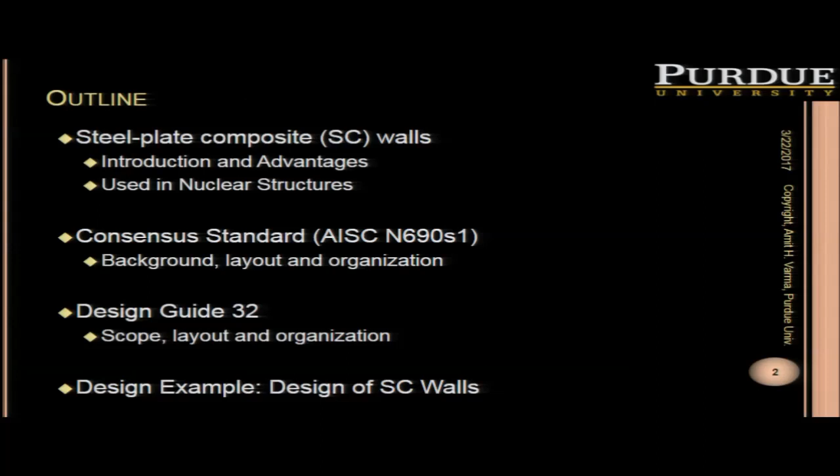Now, SC walls—the motivation for their existence comes from the history of construction methods. We have been trying to accelerate our construction schedule for several decades. We started off with reinforced concrete, looked at slip forming, steel deck construction, and then slowly arrived at modular SC construction. The reason for that is, of course, the rebar congestion that one can get when designing using reinforced concrete.

The motivation is because rebar cages can be time consuming. You can virtually have a wall of rebar on the exterior surfaces, and then questions about concrete flowability and so on arise. So in order to address some of these topics, steel plate composite construction has been proposed and used to provide designs for nuclear facilities.

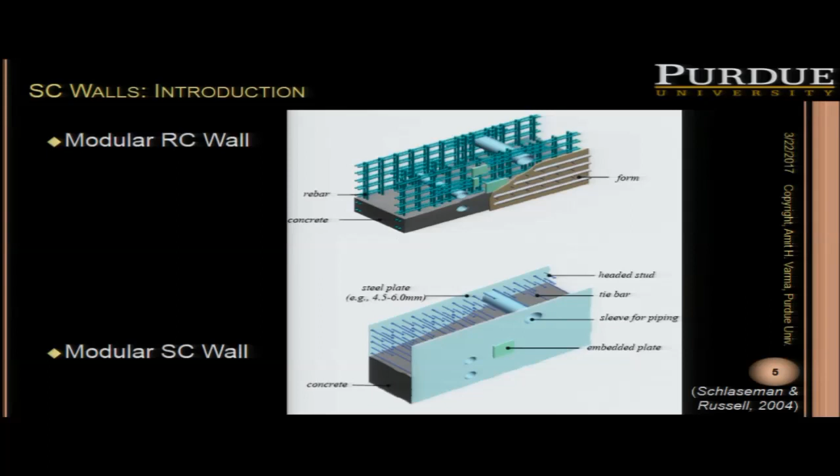Whereas for a modular SC wall, the steel plate itself is a stay-in-place formwork, as you're seeing here. We've talked about the rest of the components in the system. It's relatively easy to accommodate embedment plates and attachments, and also sleeves for piping and so on.

Modularity is really the key, and we have modularity as a structure and modularity from a construction perspective. It permits prefabrication, pre-assembly, and modularization to reduce construction time. The modularization of the steel modules and submodules allows for easy concrete placement, perhaps penetrations and attachments as well.

This steel plate composite construction has been identified as part of the modular solution. I believe some of the newer SMRs are also utilizing these steel plate composite walls.

Where have they been used in the nuclear industry? Just a listing of the projects: it has actually been used by GE, Hitachi, and Toshiba in their ABWR located in Kashiwazaki-Kariwa, Japan, Units 6 and 7. That was used in 1996.

I've actually seen a mock-up of the steel plate composite containment internal structure in Japan when I visited MHI. They've been used extensively in the AP1000 plants being built in China, in South Carolina, and in Georgia. The US APWR plant, designed by the Japanese and by MHI, extensively uses steel plate composite modules.

The APR Plus, designed by the Koreans - I was in Korea last week having a discussion with KHNP and KINS about their APR Plus design. They definitely are using steel plate composite systems there as well.

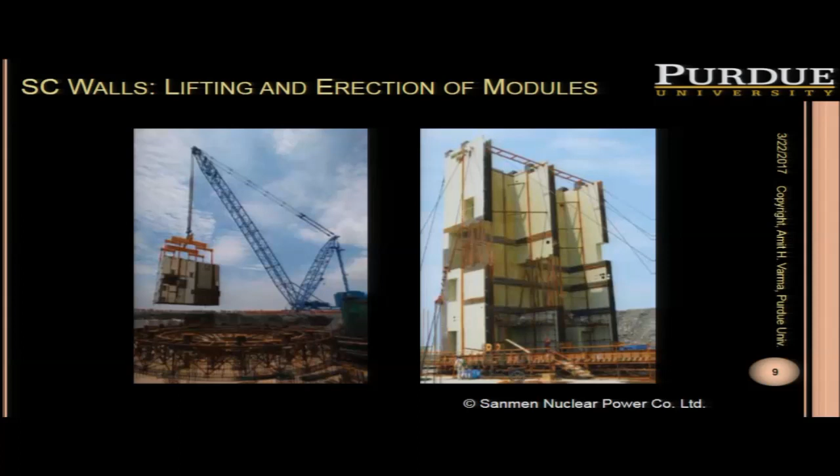These are some pictures from Sanmen in China. You're seeing a module being lifted up and brought in and placed at the site, inside the pit. These modules get really, really large fairly quickly.

I'll draw your attention to something interesting here. You'll see these dowel bars sticking up from the concrete foundation. This is a picture from Sanmen, and the SC wall is being lowered onto this.

You remember this detail - we'll talk about it about 40 minutes from now. The connection between the dowel bar and the steel plates, we'll talk about that when we get to the topic of connection design.

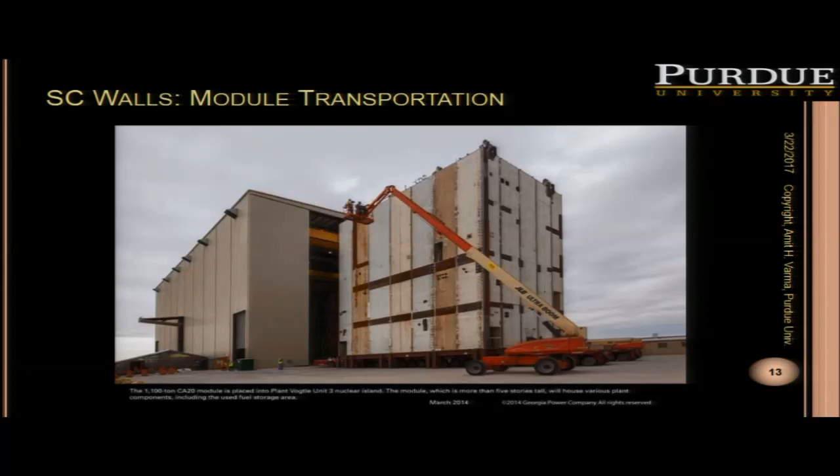This is a picture of the module being taken out - this is how big they get. This is a 1,100-ton CA20 module. The steel module has been fabricated with the plates, the studs, and the tie bars, and it is being shifted to the site for placement.

But in order to use these systems, what we really need is a consensus standard. This was published in August of 2015 - that's AISC N690 S1, which includes supplement number 1.

Appendix N9 focuses on the design of SC walls, and you would essentially use AISC N690 S1 instead of ACI 349 for the design of the structure. It includes specifications for SC walls and also the associated connections.

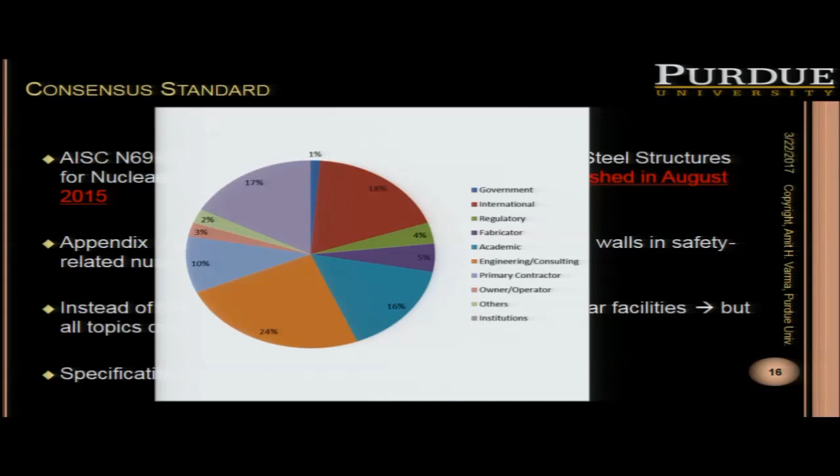This just shows you it's a consensus standard, so all the people who were involved in the committee that developed this standard include people from the government, international collaborators, regulators, fabricators, and so on. So quite a wide variety of people who've participated in the development.

We started developing the specification in 2006, and it went on till about 2015. The cumulative man hours exceeded thousands of hours just in the meetings needed to develop this consensus specification. And there it is, AISC N690 S1 2015.

It's a free download. You can download it from the AISC website, and it includes all kinds of cool provisions, and Sahas is going to talk about some of them, particularly for the design of SC walls.

When you look at Appendix N9, you'll see there are 4 sections: one on the design requirements, one on the analysis, and then the design of walls and connections as well. Today we're going to talk about pretty much all 4 of them.

The specification was great. It was a consensus standard that had been provided, but everybody felt there was a need for a design guide that would explain how to use the specification in design. So we've been working on it—really, Sahas has been working on it for the past 2 to 3 years.

He's done a great job putting it together. It supplements the SC specification in the sense that it shows you how to really use it. We are expecting the design guide to be published sometime around June of 2017.

And that's my cue for inviting Sahas to come up and talk about the SC wall design example, which consists of these 4 steps that he's going to talk about.

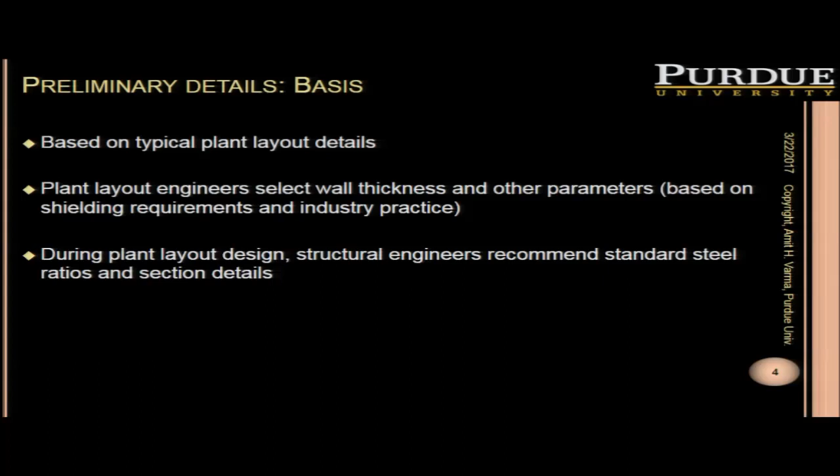During this phase, what the structural engineers can do is recommend standard steel ratios and section details. Once the layout design phase is done and you have the layout finalized, you'll come to the detailed design phase where you can check, design, finalize, and optimize your SC design.

In this session we're going to consider a typical SC wall and design it. We'll go through all the steps of the specification and see how you would use it.

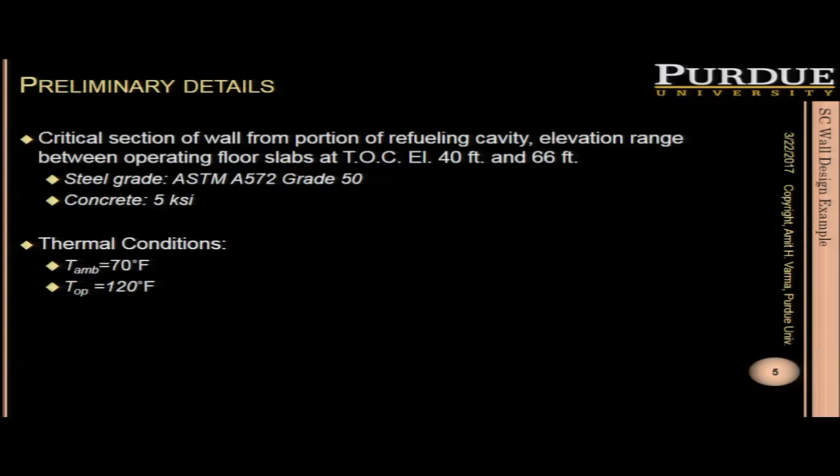The preliminary details for the example: we are considering the critical section of a wall, a portion from the refueling cavity, between elevations 40 feet and 66 feet. The steel grade is grade 50, concrete is 5 KSI. You would get the operating thermal conditions and ambient thermal conditions for the plant. We are not considering any openings or attachments for this particular wall.

As Dr. Varma showed you, a typical SC wall would have openings and attachments. The specification also talks about fabrication and construction tolerances, which are very important because of the size of the modules you saw — you need to combine the modules, so those tolerances need to be satisfied. For this example, we are considering that those tolerances are met.

For the preliminary details of the wall, you get your unsupported height. The SC section thickness is governed by the plant layout shielding requirements. Then the faceplate thickness can be decided by the structural engineer, who can start with a particular reinforcement ratio, which gives the faceplate thickness. The shear connector spacing and tie spacing — you would start with a typical value, and once you start optimizing your design, you could optimize these values.

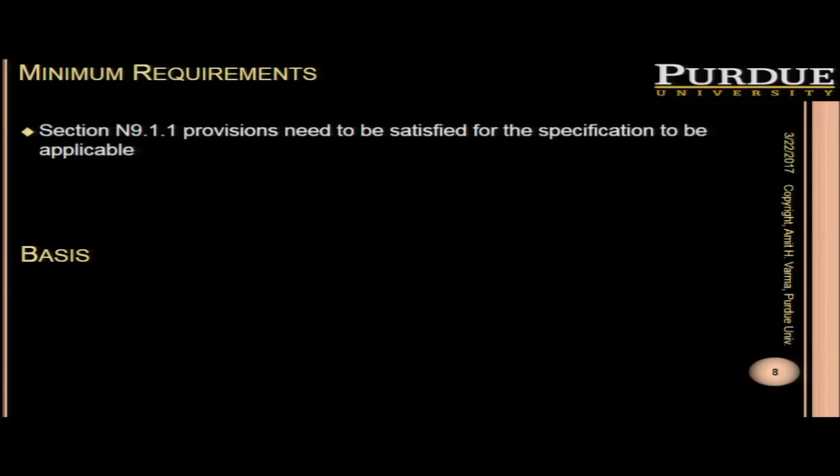With our preliminary details, we want to see if the parameters satisfy the minimum requirements of the code, so we can use the provisions of the code. These requirements given in this section of the code need to be satisfied, and the basis is that the provisions are based on a range of experimental data, and these requirements are for that experimental data.

There is a need for detailing the SC walls to prevent certain limit states or failure limit states from governing. There's an EJ publication coming out in the second quarter which talks about all of these minimum requirements, the sectional detailing provisions, and the basis for all of them.

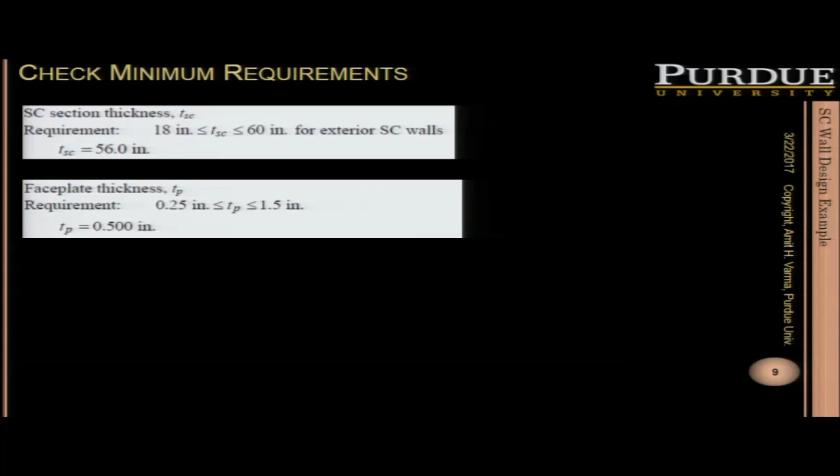We're going to verify that we are meeting these requirements. The SC thickness — we have a 56-inch thick wall, which meets the requirements. Our faceplate thickness is 1/2 inch, which meets the requirements. The reinforcement ratio, which is the ratio of the area of steel versus the total area of the wall, meets the requirement. The basis for all of these is discussed in the design guide.

It's discussed briefly in the specification and in the publication we just talked about. The yield stress needs to be between 50 KSI and 65 KSI. For concrete, it needs to be between 4 KSI and 8 KSI, and the code doesn't allow lightweight concrete as of now. We need to satisfy the detailing requirements, which we would talk about: the faceplate slenderness requirement, shear connector detailing, and tie detailing.

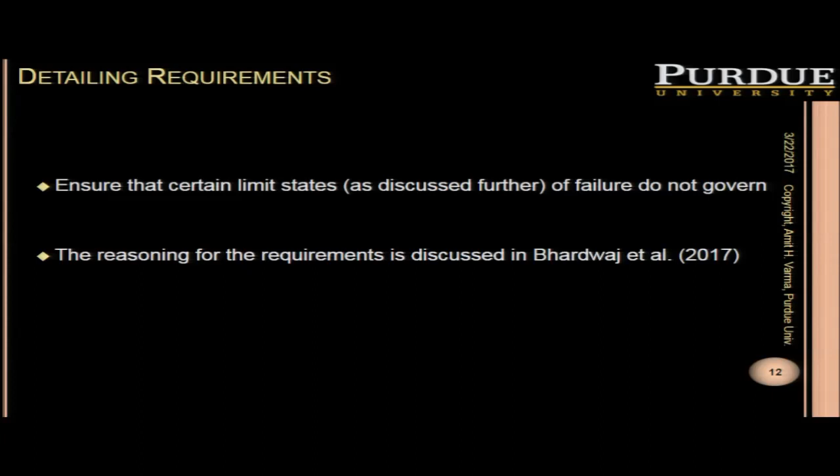We'd start off with the faceplate slenderness requirement. These detailing requirements ensure that certain limit states of failure do not govern your design. The first one ensures that your stud spacing is limited so that the faceplate yields in compression before compression buckling, and that's the requirement.

Where b is the largest unsupported length of the faceplate, the requirement states that as long as your faceplate slenderness — the ratio of the largest unsupported length to the faceplate thickness — is less than the root of E by F, you meet the slenderness requirement. I'm tempted to go into the basis of these things again, but all of that is available in the design guide, you can look at it.

For our design, we said the stud spacing is 6 inches and the tie spacing is 24 inches. So you have your ties spaced at 24 inches, and then you have studs in between those ties, which are spaced at 6 inches.

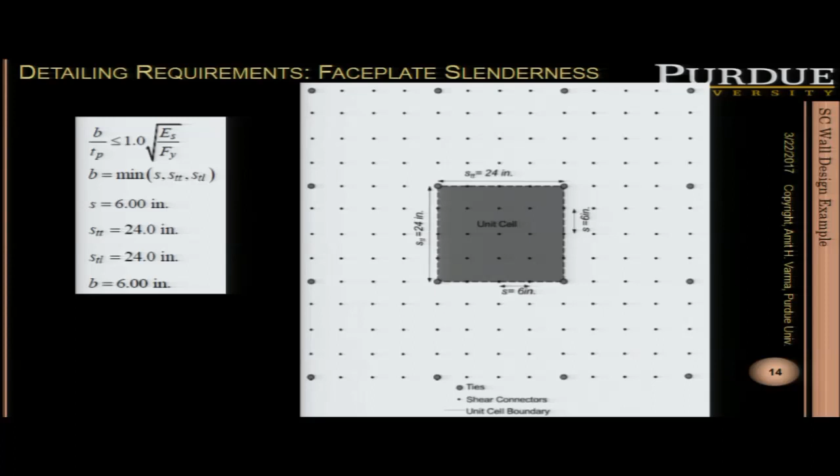So the largest unsupported length for this configuration would be 6 inches, and it would be different for different configurations of studs and ties. You can calculate the slenderness ratio and check it with the requirement in the code to meet that requirement.

Next step we get into is the shear connector detailing. The shear connector detailing ensures that the stud spacing is limited to ensure the composite action in SC walls.

You would start off classifying the steel anchors as yielding or non-yielding, based on whether the anchor can maintain an interfacial slip greater than 0.2 inches when the load is 90% of the peak load. For this example, we are using steel-headed stud anchors, which are classified as yielding. If you're using any other kind of anchor, you would have to perform experiments to see if they are yielding or non-yielding. If you have a combination of yielding and non-yielding anchors, the system is classified as non-yielding. For this example, we are using yielding anchors.

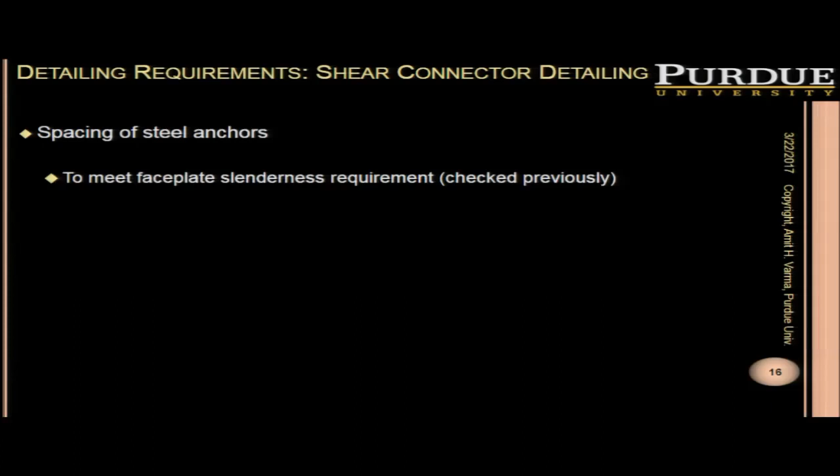The next thing in your shear connector detailing would be the spacing of the connectors. There are 3 criteria: the faceplate slenderness requirement, which we just looked at; the requirement to achieve a desired development length, which gives another spacing limit; and the requirement to prevent interfacial shear failure from occurring before out-of-plane shear failure. We'll discuss that briefly.

Let's look at this development length requirement. This development length, similar to what is in reinforced concrete, is the distance over which the faceplate can develop its yield strength. That depends upon the area of steel anchors provided and the shear strength of a particular anchor. C1 takes into consideration if the anchor is yielding or non-yielding, and that's the shear strength of the anchor. The designers can decide what is the development length - we have a recommendation, and TP is the yield strength.

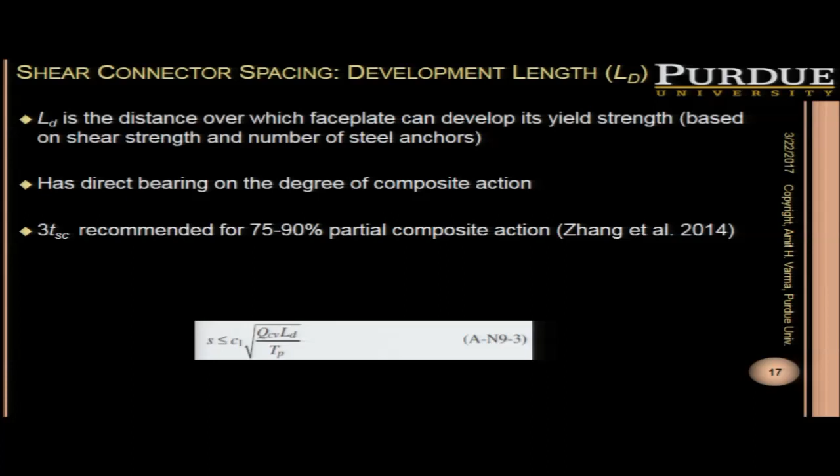Now, the development length has a direct bearing on the degree of composite action you can get. Zhang et al. recommend that if you have a development length around 3 tsc, you can get about 75 to 90% of the partial composite action. So for our example, we'll consider the development length 3 tsc.

Since we're using steel-headed stud anchors, from the spec we can calculate the available shear strength. But in case you decide to use something else as a steel anchor, like flat bars, you would have to calculate the available shear strength from experiments. You have your faceplate tensile strength, and using those values along with the factor that accounts for yielding or non-yielding anchors, you can see the requirement is satisfied.

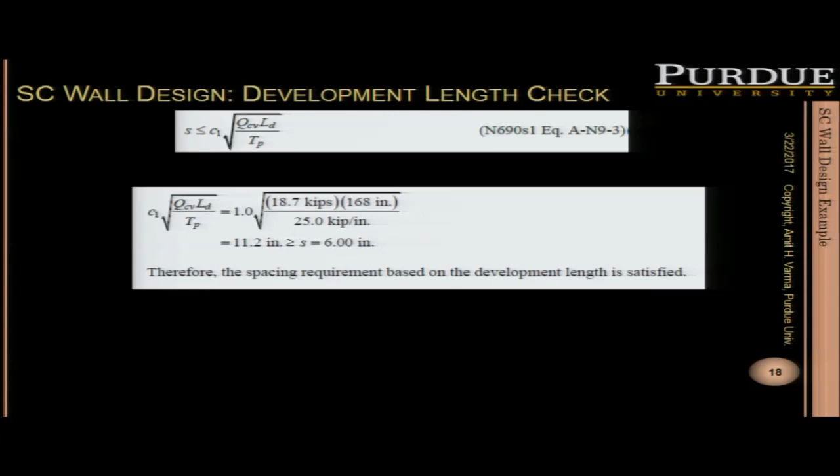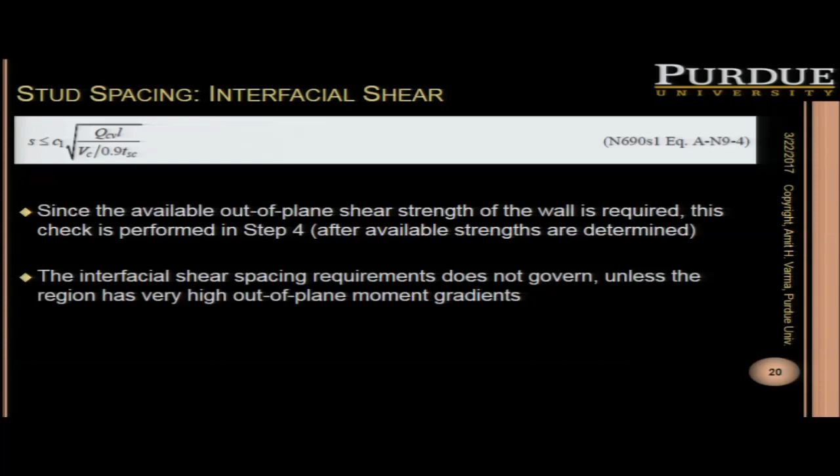The next thing was interfacial shear. We need to limit the stud spacing to prevent interfacial shear before the out-of-plane shear failure - we want to avoid the interfacial shear failure mode. That's the spacing requirement; C1 again takes into consideration if it's yielding or non-yielding, and VC is the available out-of-plane shear strength, along with the shear strength of the anchor and the SC thickness. We need the available out-of-plane shear strength to check this requirement, but we haven't calculated it yet - we don't have any available strengths as of now. So once we calculate the available strengths, we'll get back to this step and check this calculation.

We've looked at the faceplate slenderness requirement, and we've detailed the studs. Let's get to the ties.

What do ties do? What is the purpose? As the name suggests, they tie the structure together, providing structural integrity by preventing section delamination or splitting. Dr. Varma is going to show you a couple of figures in his presentation on what we're talking about. So ties hold the section together - they serve as your out-of-plane shear reinforcement, so they are the shear stirrups of the SC wall.

They contribute to the interfacial shear strength, and again, you would need to experimentally determine their contribution. They participate in the force transfer in the connection regions, and once you've looked at those empty modules - the size of those modules and how they need to be lifted and transported - they help maintain the form of empty modules.

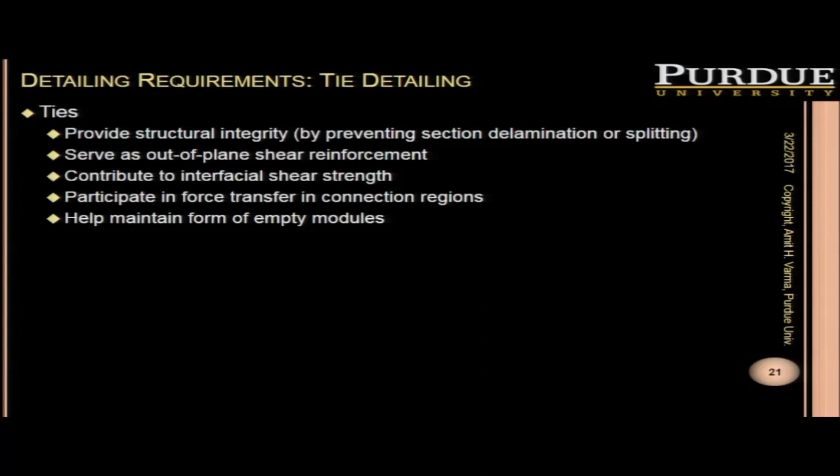The spacing requirement is that the spacing needs to be less than section thickness. We said our spacing was 24 inches in both directions, which is less than the section thickness, so we meet the spacing requirement. Next is the classification of ties.

Their contribution to out-of-plane shear reinforcement would depend upon if they're yielding type or non-yielding type. You'll see we've kept a safety margin, and that safety margin is to account for the difference between the nominal and the measured properties.

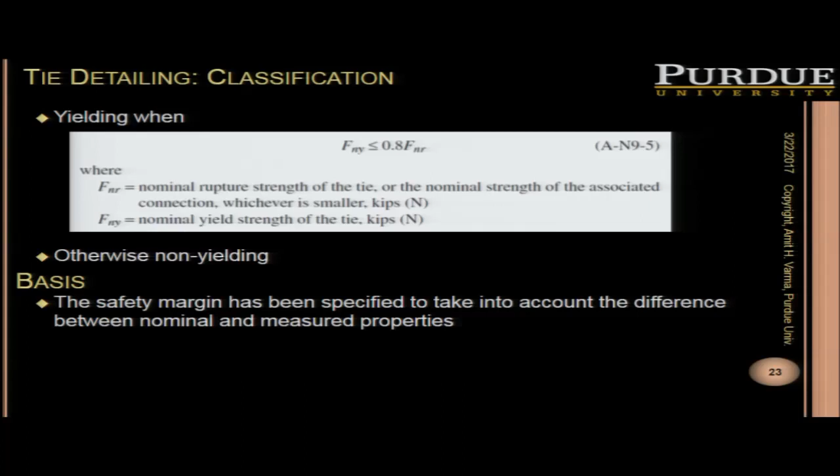The nominal strength would be either the rupture strength of the tie or the nominal strength of the connection, whichever is lesser. For our design, we can calculate the tie rupture strength and the tie yield strength. We considered that the tie-to-faceplate weld is a CJP weld, so the connection would be stronger than the tie.

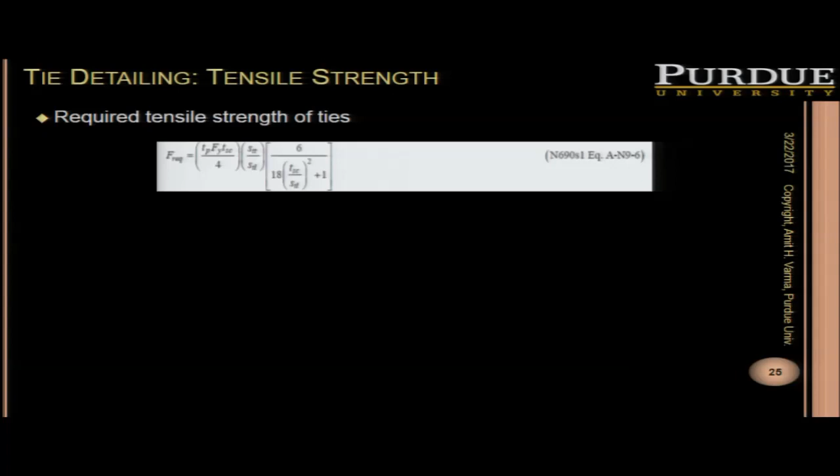So we can see if this requirement is satisfied, and we have yielding ties in our section. When we said what ties do, we said they prevent delamination of the section, which means they have some tensile strength requirement. This is based on a postulated failure mode where the section can delaminate, which would happen if you loaded just one element, either the concrete or the steel faceplate.

There would be an eccentric moment which needs to be resisted, and this force corresponds to that resisting moment. We can check that - we have all the parameters we need: the spacing, the section thickness. That's the requirement, and we can check the available tensile strength of ties, and we satisfy that requirement.

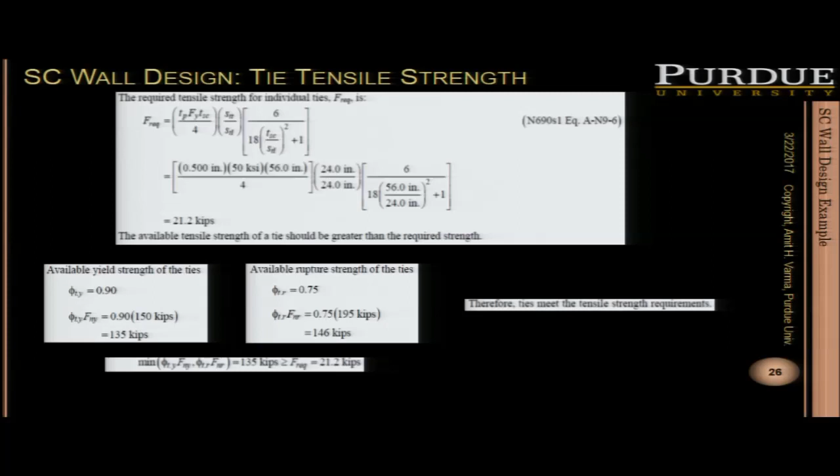So we've seen that we can use the code. We've done the major part where we've detailed our section. Now we come to the analysis procedure, where we talk about what stiffnesses to use and how to model the SC wall.

You need to check if you need to do a second order analysis - typically it would not be required. Then you need to do analysis for accident thermal loads.

Another important thing, since we are not doing that in this design example, I'd like to talk about is modeling your openings. You need to see if it's a small or large opening, and then the code and the design guide talk about the modeling and detailing requirements for those openings.

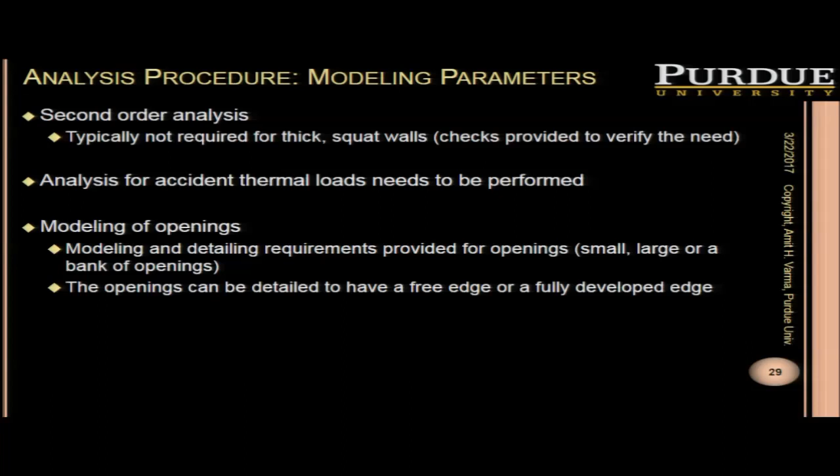The openings can be detailed to have a free edge or a fully developed edge. With a free edge, some region around the opening doesn't behave as an SC, and you need to accordingly consider that in an analysis. With a fully developed edge, you can consider it as an SC right from the edge of the opening.

So for our analysis, we did a 3D SC wall using elastic thick shell elements. That's something I'd like to talk about - you've got an SC wall which has studs, tie bars, plates, and it would have openings, but what you're going to model is just a thick shell element.

Since it's an elastic element, all you have to play with is the section thickness, the elastic modulus, and the Poisson's ratio. The importance of this we'll get to know once we talk about the model parameters as we go forward.

The analysis model parameters: we check the second order effects - we do not need to consider them. We have not considered any openings. We have performed the accident thermal analysis, and we'll discuss them.

So we have the operating thermal conditions, and that's something important we'll talk about. There are going to be two conditions, so you would be doing two analyses. One would be for your operating thermal conditions, which we are calling condition A, and the second would be your accident thermal conditions, which we are calling condition B.

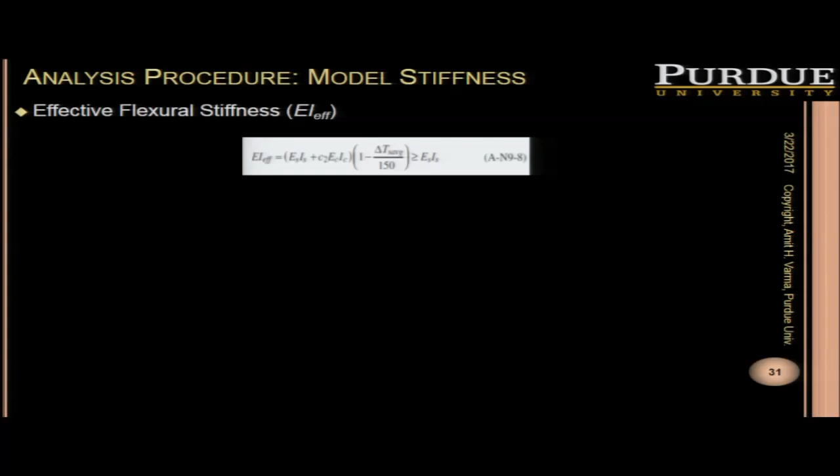Let's start talking about the stiffnesses of the model. First would be your flexural stiffness. And you see there's the steel contribution, there's a concrete contribution, but there's a factor, C2.

What has been observed is that the uncracked stiffness is not manifest, due to shrinkage, cracking, and partial composite action. This is the calibration factor which ensures that your stiffness is crack transformed stiffness. Then you see there's a temperature term, and once you go above 150, it's fully cracked, and the only stiffness you have is the steel stiffness.

So we can calculate the stiffness of a section: the moment of inertia for concrete, the moment of inertia for steel, and then the calibration constant is in terms of stiffness adjusted modular ratio, which we can again.

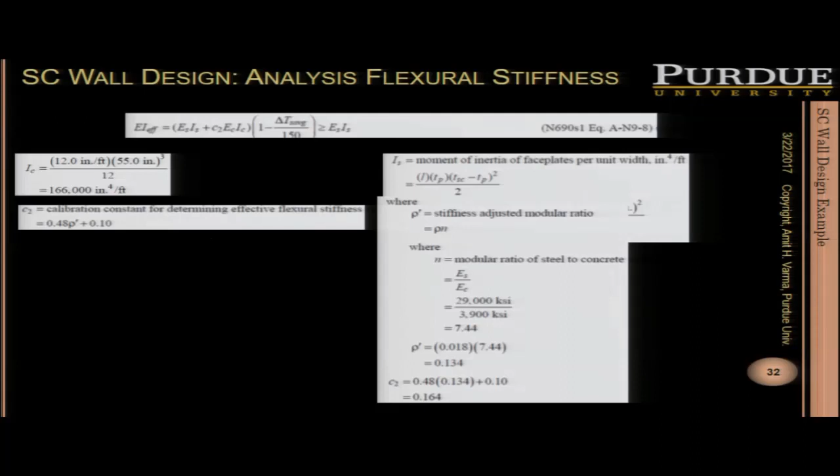So, like I said just a while ago, you would need to do two analyses: one for your operating conditions, and the other for your accident conditions. So you can calculate all the parameters, and this delta TS average, which is the average of the maximum temperature rise in both the face plates.

For operating conditions, it's considered 0, and you can calculate your crack transformed stiffness and your steel stiffness. Once you get to the accident thermal conditions, you would see that this term goes negative and your steel stiffness controls, which is what we said. In the accident conditions, it's fully cracked, and you just have the steel stiffness.

Then we get to the in-plane shear stiffness, and this depends on what is your in-plane shear demand. If your in-plane shear demand is less than your cracking threshold, you have your uncracked stiffness. If it's greater than twice your cracking threshold, you have your cracked stiffness, and then you can interpolate.

For this design example, you don't have your demands before you do your analysis, right? So you need to assume, okay, my demand is this, and then do your analysis and verify. If you're okay, it's good, otherwise you would have to come back.

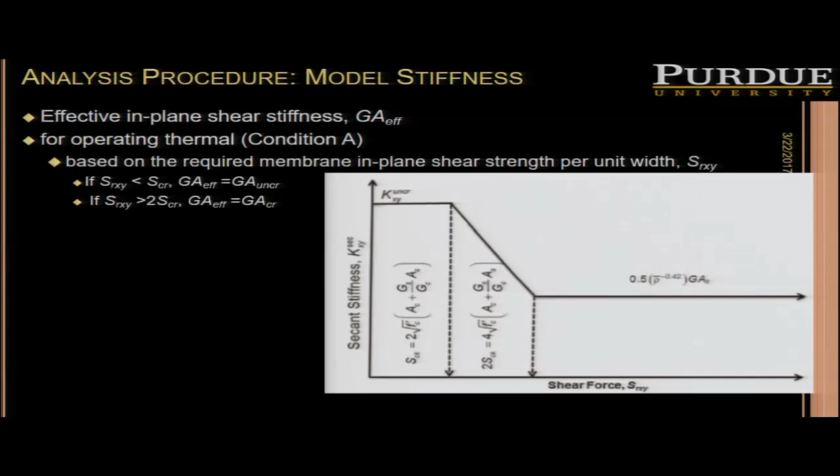For this, we consider we are in this region. And the basis is your in-plane behavior is based on steel plane stress and orthotropic cracked concrete behavior, and it's discussed in detail in the design guide.

So for condition A, we can calculate the cracked stiffness using all the parameters. We can calculate the uncracked stiffness, steel stiffness, concrete stiffness, and then the cracking threshold is considered as 2 root F prime C in PSI units. These are KSI units, so it looks a little weird.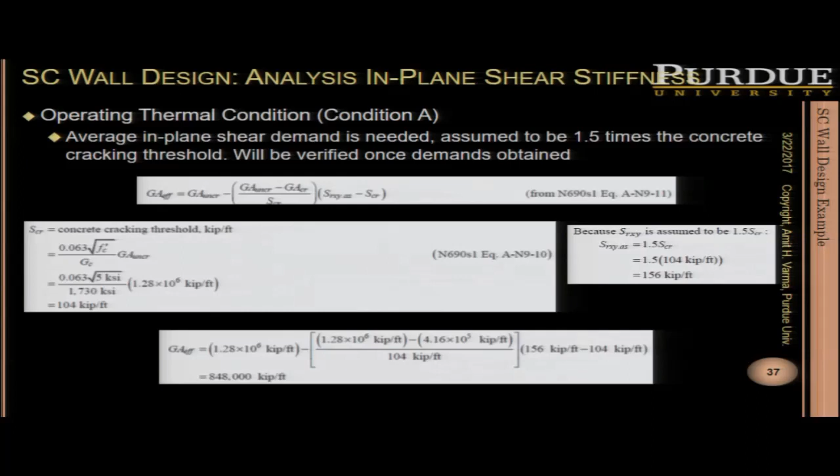This is what we assumed, that your demand is 1.5 times your cracking threshold, and then you can calculate your effective stiffness. For accident thermal conditions, it would be your cracked stiffness, and the basis is because you would have nonlinear thermal gradients which would cause concrete cracking in both directions. So we've used cracked in-plane stiffness for accident thermal conditions.

Next we come to material properties. This is where everything would start coming together. So remember, we have an elastic model, and for that model, the Poisson's ratio, thermal expansion coefficient, and thermal conductivity would be the properties of the concrete, because the concrete would govern your thermal induced displacement. The concrete is what occupies the majority of the volume.

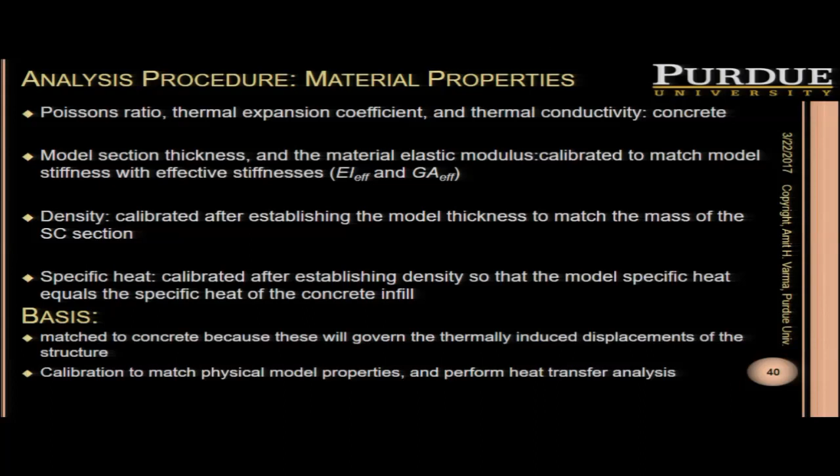For that elastic model, we have calculated these effective stiffnesses. We would calibrate our model section thickness and elastic modulus so that the stiffnesses of our model match what we've just calculated. Then we would calibrate the density so that the mass of our model matches the physical mass, and the specific heat is calibrated so that it matches with the specific heat of the concrete. So we have an elastic model where we are calibrating to match the physical model properties and perform the heat transfer analysis.

So we'll quickly look at, all these parameters are concrete parameters. So you have calculated your effective stiffnesses, and then you have your modulus for the model and the thickness for the model. You've got two equations. You can calculate the values for operating condition and for accident condition.

Your material density should match the mass of the physical model, and your specific heat should match the specific heat of the concrete. This is what it looks like. It could be confusing because you're not modeling a 56-inch thick wall - this is the thickness of your model for operating conditions and for accident conditions.

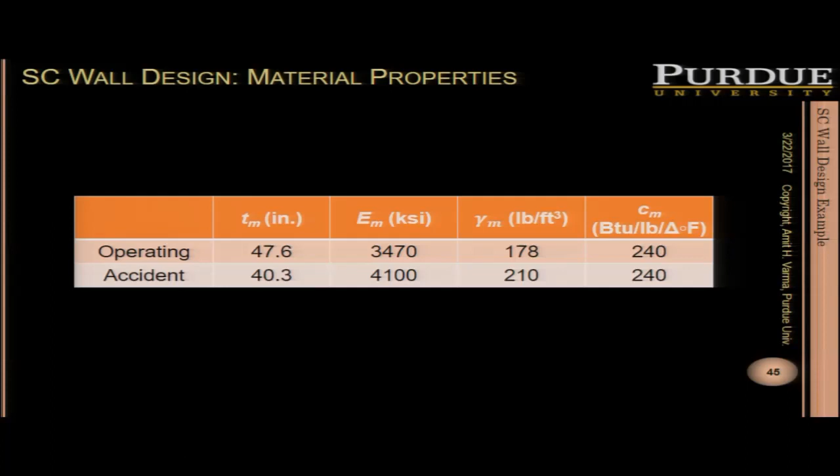That is why I said you're going to have two analyses. You're going to have two models, one for accident and one for operating.

Let's talk a little bit about the thermal loads. You would need to do heat transfer analysis using the material properties we've just defined for accident loading. These analyses would give you surface temperature histories and through-thickness temperature profiles, which would be a nonlinear thermal gradient. If it's one-sided heating, you can see that nonlinear thermal gradient through the thickness, through the depth of the section. What we do in the analysis is pick up these points and use a linear thermal gradient for the analysis.

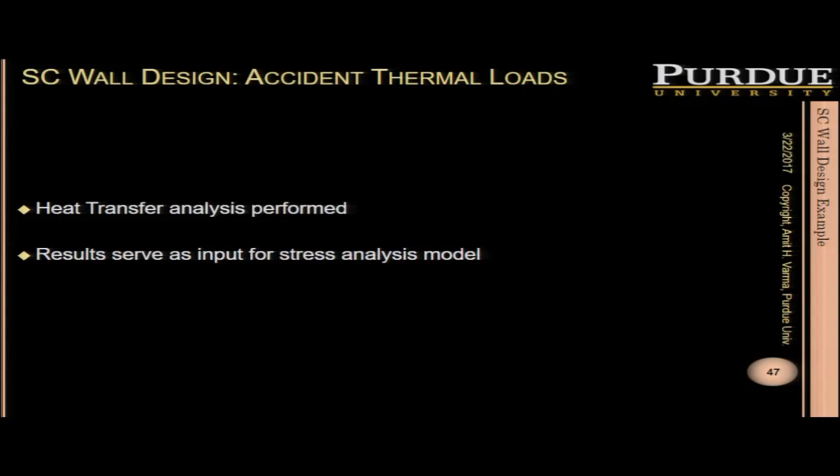So the thermal load is applied as a linear temperature gradient through the wall for the stress analysis. That is what we did for the example - we did the heat transfer analysis, and the results from that served as input for your stress analysis model.

Let's talk a bit about the load combination. Chapter NB2 provides the basic load combination, and based on project requirements and the design basis document, you can have additional load combinations. These load combinations imply linear superposition of demands - that's again why it's important that we have that elastic model. The combinations are there for condition A and for condition B. In operating condition, we do not consider concrete cracking, and in the accident condition, we consider the concrete cracked.

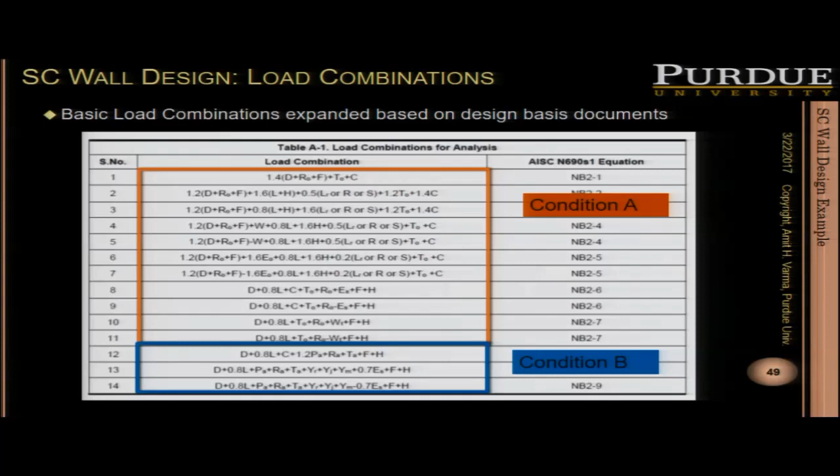So those are the basic load combinations from N690. You see the operating T-naught - these are the condition A load combinations, and then condition B load combinations 12, 13, and 14, which have the accident thermal conditions. You could expand on them based on your project requirements. So these would be your basic load combinations.

The specification does allow averaging over 2tsc by 2tsc in the interior regions, and over tsc in the connection region and around the openings. The required strengths include out-of-plane flexural strengths MX and MY, twisting MXY, membrane axial strength SX, SY, and SXY, and out-of-plane shear demands. So you'll have 8 demands that you'll get for each element.

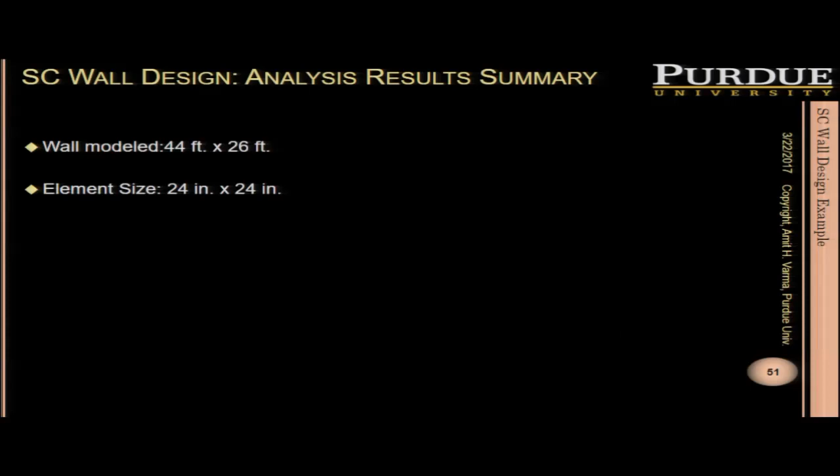So the analysis results summary - we'll just talk about the summary of the results. We model the wall, we have the element size, we use 24 inches by 24 inches. You would have all the data for each element, for each load combination, and then you would combine and evaluate that data.

What we are doing is just looking at the peak demand for each demand type, and the element numbers. What you see is the accident thermal load conditions usually govern, and the peak demands are at the base of the wall.

Averaging is permitted, but we've not done any averaging. If you recall, it's been a while, we talked about it - when we calculated the in-plane shear stiffness, I said we are assuming that it's 1.5 times the average demand. So that's the ratio of the demand versus the cracking force, and you see the average is around 1.5. So we are okay, we don't need to redo the analysis.

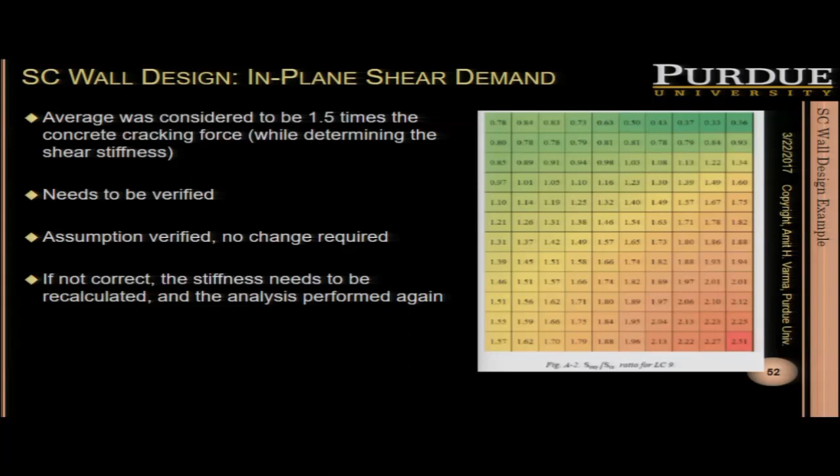What's the time? Okay, so this is when I would start sprinting. So that's the design procedure. What I want to do is quickly show you how you would calculate the individual available strengths, the demand capacity ratios, and what are the interaction requirements in the specification.

Let's start with uniaxial tension. It's governed by the lesser of the tensile yielding or the tensile rupture. You can calculate the available strength, and then you can calculate the demand capacity ratio for all the elements in the wall. You would do the same thing for the compression.

You would calculate the buckling stiffness, and then go to the specification and calculate the compression demands. But if you look at it, you would see it's very over-designed because the thickness of the section is based on the shielding requirements. Dr. Varma is going to talk more about why this is important and how it would affect your connection design.

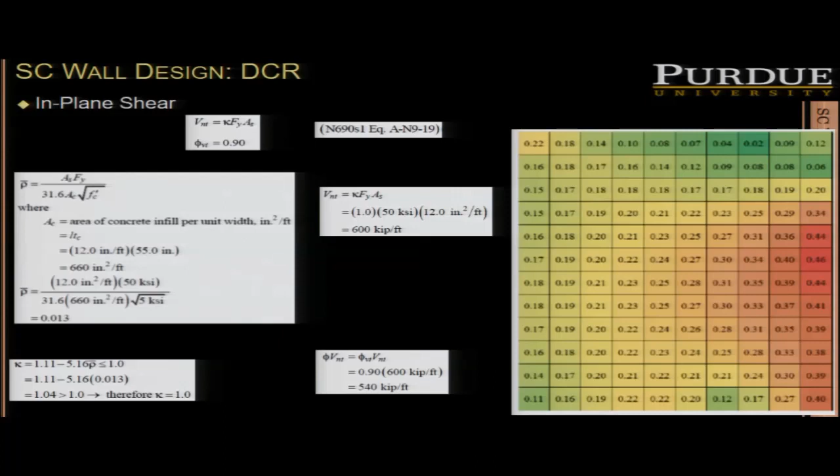Your in-plane shear is based on the faceplate von Mises yielding limit state, so you see there's a factor of 0.9. Kappa is the calibration factor, and you can calculate the in-plane shear demand and get the demand capacity ratio for it. The out-of-plane flexure is again governed by the limit state of faceplate yielding and tension, and you can again calculate the demand capacity ratios for the out-of-plane flexure.

Now the out-of-plane shear depends on the spacing of your shear reinforcement. If your shear reinforcement is less than half the section thickness, you can add the concrete and steel contributions, which is the case for us. The concrete contribution is 1.5 times root F prime C in PSI units, and the steel contribution is limited to 8 root F prime C in PSI units. From this you can calculate the out-of-plane shear demand, and then comes the interfacial shear check.

We needed this out-of-plane shear demand to check the interfacial shear requirement, and once we have that we can check. This is what actually governs our shear stud spacing. It comes out to 7.8 inches, and our spacing was 6 inches.

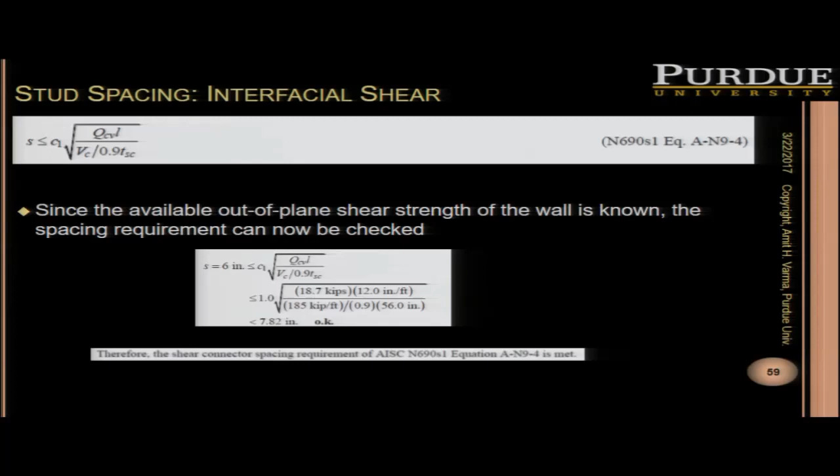Now the interaction of demands. The specification says you need to consider two types of interactions. One is the out-of-plane shears and the interfacial shear demands. We're going to pick just one element, one load combination, and all the demands. If your out-of-plane shear demands are greater than the concrete contribution to the strength, you have an interaction, and that's the demand-capacity ratio. It would take 1.5 hours to fully explain this, so I'll skip the details, but you can calculate this demand-capacity ratio and check if your interaction is satisfied.

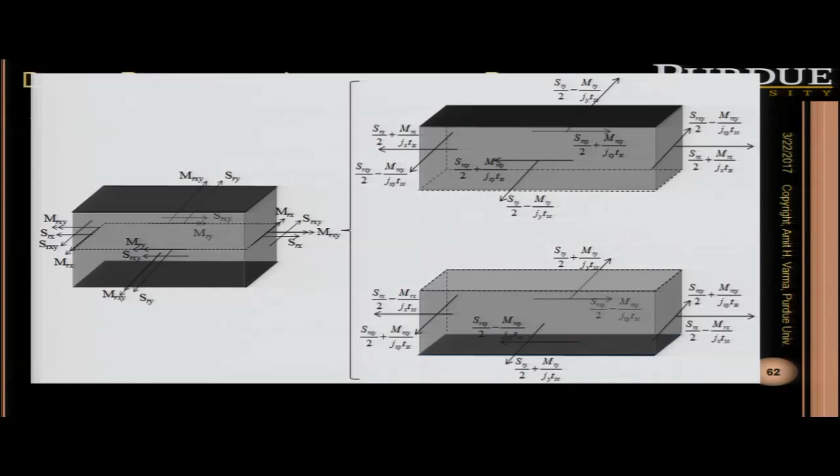The second interaction involves all of your out-of-plane moments and the in-plane membrane forces. You have three in-plane membrane demands, SRX, SRY, and SRXY, plus your out-of-plane moments. You're required to evaluate this interaction for each notional half. We've split this into two notional halves, and the moments are considered as couples based on the lever arm, which depends on the extent of cracking. Based on that, you calculate S prime Rx and Rxy using the moment and the lever arm. Then you can calculate the principal stresses, and depending on which region you're in, one of these interaction equations applies. We also provide the interactions in terms of in-plane forces.

Now let's look at how this looks. We've done just one element for one load combination. Here we've done one load combination across all the elements, and you see all the data points. So what we do is take the demands, calculate the principal stresses for all the elements, and that gives you your interaction surface.

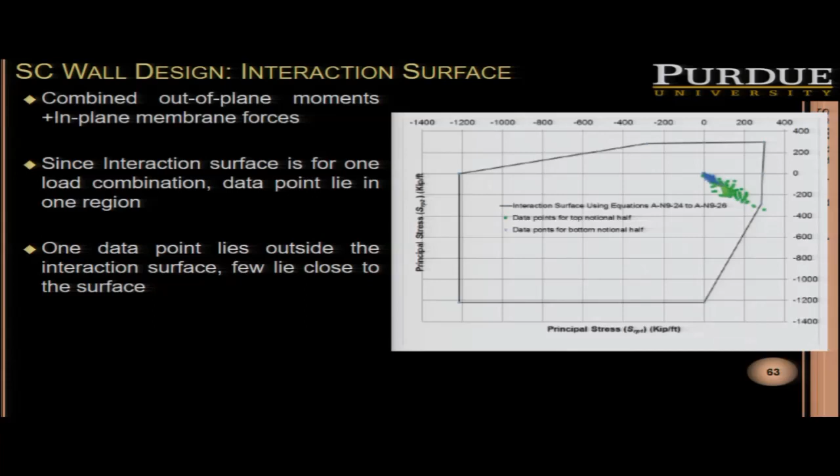You see there's one element lying outside and one right on the boundary, so we would need to redesign the wall. Either we can use a higher grade of steel, or we can average the demands for ductile limit states.

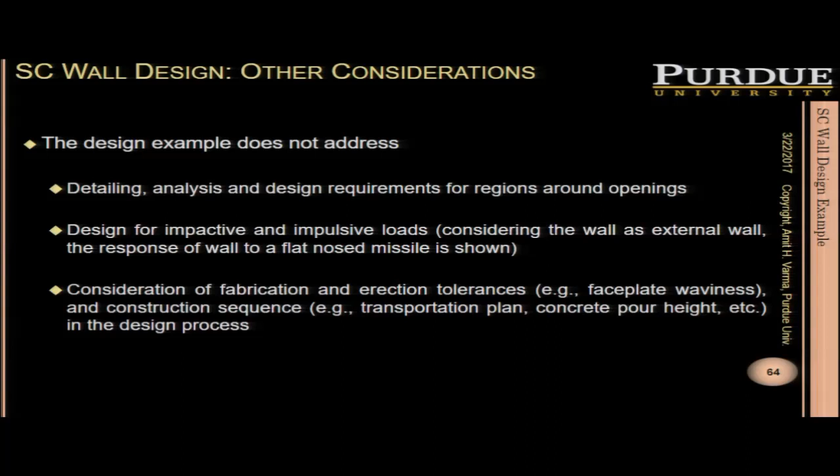Some things we've not considered here: we have not considered regions around openings, which you'll need to do. You also need to design for impactive and impulsive loads—we do provide one figure to help with that. And because of the size of the modules, you need to consider fabrication and erection tolerances in the design procedure.

I can take a breath. Thank you. Okay, thank you, Sahas.

I think you did a great job in spite of the technical difficulty. You got a chance to see how the SC wall is designed, and there are lots of details—it's a complicated and extensive design. But I think the takeaway is those contour plots he showed for the elements, the demand-to-capacity ratios. That's a nice way to think about how you've checked the design and what it shows in terms of the capacities available. If you download the design guide and study it in more detail, you'll see that one of the highest demand-to-capacity ratios he had was for out-of-plane shear, at about 0.56.

And then there's that interaction surface, which accounts for all of them acting at the same time. There were some points that were getting outside of it, so you would have different options—you may need a thicker plate, or a higher grade of steel, or you may want to revisit that element to see what is causing that point to lie outside. In the third part of this presentation and the design guide, we talk about the design of connections.

Design guide 32 focuses on the types of SC wall connections and some of the design challenges that SC connections and connection regions are going to have. I'm going to introduce first the different types of SC wall connections, then talk about the connection design specifications, how we've addressed them in the spec itself, what are the connection demand types, and what are the force transfer mechanisms.

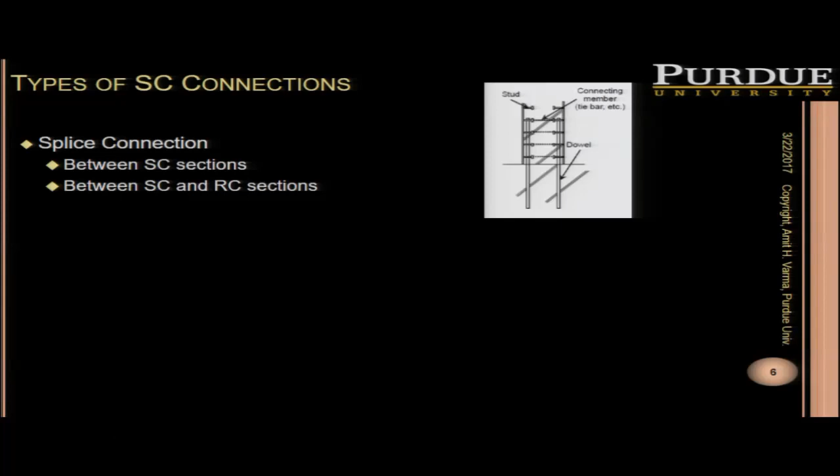You're looking at a reinforced concrete portion underneath, and the dowel bars sticking up that are just lap spliced with the SC wall itself. The dowel bars are transferring the stresses into the steel plate, and the shear studs and ties are accommodating that force transfer. That is one example of an SC-RC splice.

And we've done extensive work on these splices - quite a bit of testing. We did some years ago, and we're doing some tests right now where we're looking at the force transfer mechanism between the dowel bars and the steel plates, and the force transfer through the ties and the studs. That's what that test setup is about - how the forces are transferred from the dowel bars into the studs or the tie bars.

But this test also showed us that if you don't have ties connecting the two steel plates together, and you're trying to splice the RC portion with the SC portion, there is a potential for a splitting failure because of the eccentricity in the force transfer. Any lap connection, even a welded one, is going to have eccentricity, and you have to deal with that.

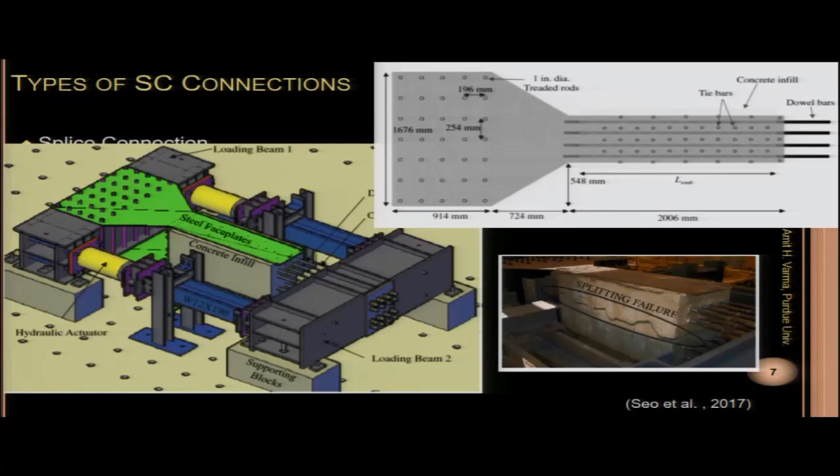We usually get away with it because the wall thicknesses are not that large. But when the wall thicknesses become really large, the tension force is up here, but the reaction is down here - they don't line up, which means there's an eccentricity. That eccentricity generates a moment, and unless you have provided ties to connect the two sections together, it'll split open because it produces a tension field due to the eccentricity.

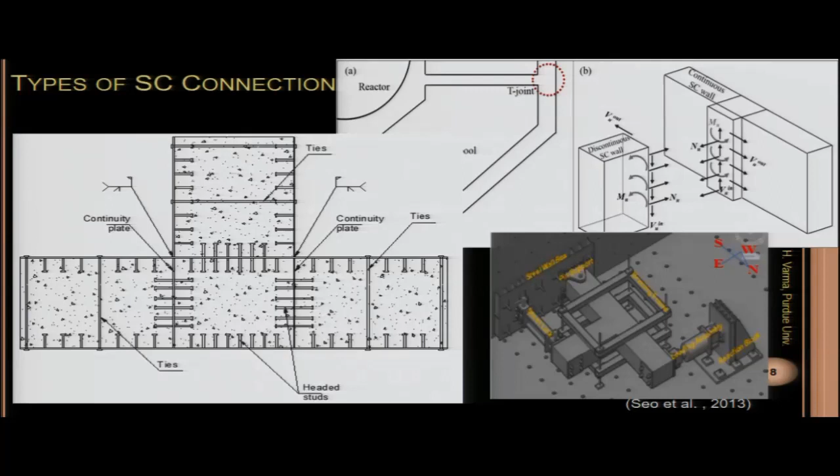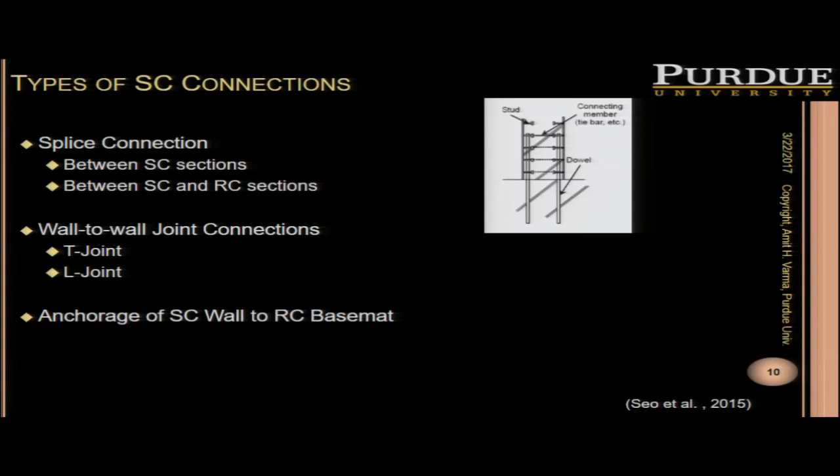Anchorage of the SC wall to the reinforced concrete basemat. This is a big topic. You can get the anchorage by using dowel bars, once again, that are sticking up from the foundation and directly spliced with the SC wall up here. This is a similar example of a test where we're going to be looking at the in-plane shear behavior, or the cyclic shear behavior, of this kind of connection where the forces are transferred from the steel plate into the reinforced concrete dowel bars and then back into the foundation.

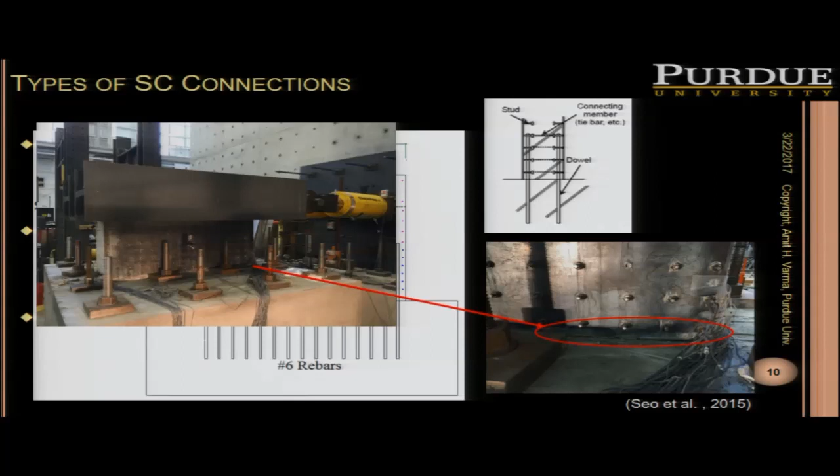We'll talk about that. So here's an example, a photograph of the specimen being readied for testing, looking at that particular connection. In this particular connection, all the inelastic action occurs at the steel plate to concrete joint interface. There is a lot of yielding of the dowel bars. The dowel bars were designed as the weakest link between the connection and the wall. There was a lot of energy dissipation, and we had good cyclic behavior from the specimens.

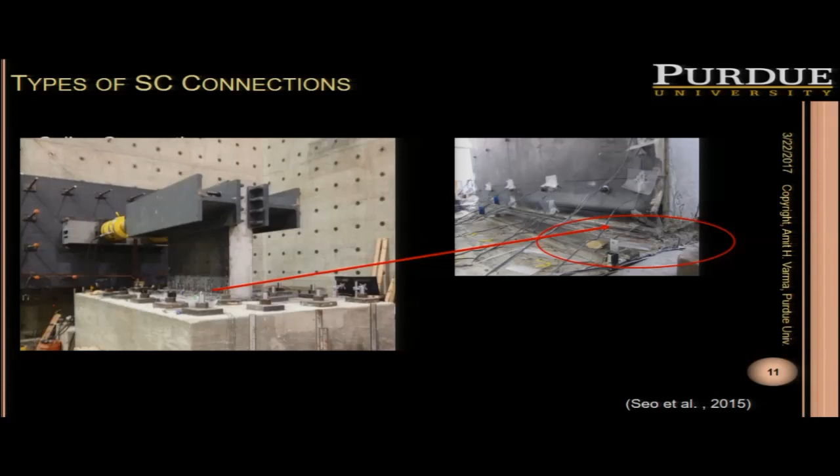And then, of course, there's the other type of design where you have a base plate that goes across the SC wall and then anchors it into the foundation. In this case, the inelastic action occurs in the wall itself above the connection region. We'll talk about what all of this means in a few minutes. So there's anchorage of the SC wall to the RC basemat.

So there are many different types of connections. You can have splice connections, wall-to-wall joints, anchorage of the SC wall to the basemat, and SC wall to RC slab connections. This is a rendering of an example connection between a reinforced concrete slab and an SC wall. In this case, the connection is achieved with the help of rebars that are attached by weldable couplers to the SC wall itself. Inside the SC wall, we have rib plates and tie bars in order to provide continuity of force flow through the connection system.

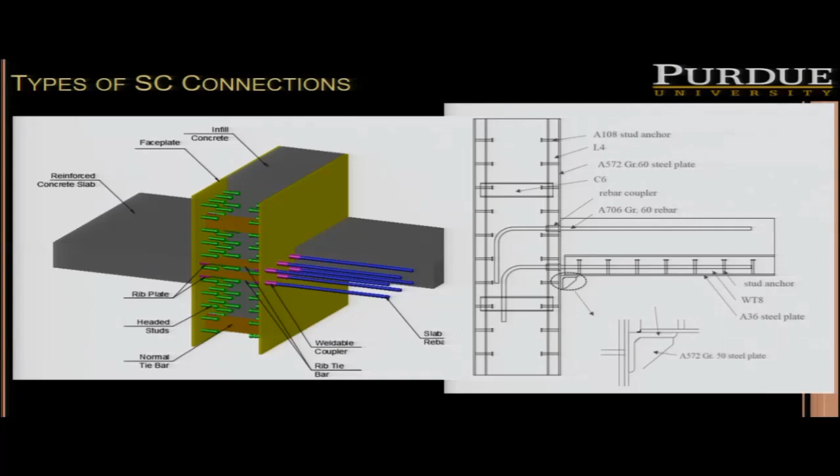There are other types of connections that are also possible. In this case, we're using the same lap spliced system to transfer the stresses from the rebar into the steel plate, and then the rebar is anchored into the SC wall itself. So there are different ways to achieve these different types of connections. But these connections are fairly complicated, and there are a lot of challenges associated with them. What is the biggest challenge? The biggest challenge is that these connections are not similar to steel or RC structures, because the force transfer mechanisms can become fairly complex.

Joint constructability and detailing requires careful consideration. Most importantly, there are no well-established rules, like you have for steel or concrete connections, that can be leveraged for the design of SC connections. That means you have to go about it carefully, looking at the force transfer mechanisms, what the constructability is going to be, and how they have to be designed and detailed. Some parts of it will be steel-to-steel connections, and some part will be concrete connections. They're more complicated as well.

Typically, you're looking at beam-to-column connections where there's a shear and a moment that you need to transfer. But in these systems, you have a lot of forces. As Sahas was pointing out, each finite element in the wall has 8 demands. And when you get to the connection region, you have to make sure you transfer most of them from one wall to the other, or from the wall to the basement. So there are lots of forces that may need to be transferred as well.

Unlike steel or reinforced concrete structures, SC walls have high in-plane shear demands, and the use of shear friction reinforcement by itself may not be sufficient for the design. It's also not easy to embed rebar into the continuous faceplates in SC walls. It can be done in a few cases. And since SC walls are huge, connections may sometimes be designed to be weaker, in which case there are questions about whether there is adequate inelastic deformation capacity or not.

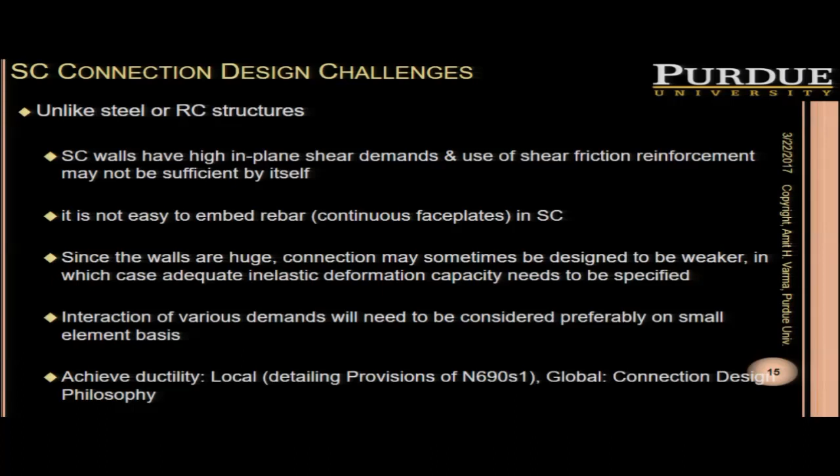The interaction of various demands will need to be considered, preferably on a small element basis. And the question, of course, is: am I going to achieve ductility? Local ductility at the connection, and global ductility in the overall wall and connection system as well.

When we talk about the connection region of the wall itself, SC walls and the systems they're part of are labyrinthine. They're interconnected, connected to the base mat and the slabs. The connections use an assembly of connectors - steel anchors, ties, welds, bolts, etc. And these participate in different force transfer mechanisms for different demand types between the two connected parts.

So here I'm showing you a picture of a typical SC wall. What do I mean by the connection region? As you can imagine, if this wall is connected to another wall here, or anchored into the base mat, over this region you slowly transfer the stresses from this wall into the foundation, and transfer the forces from the foundation into the wall. Over this region, you develop composite action between the steel plate and the concrete, because the stresses are becoming equalized. So this region, the connection region, needs to be less than 2 times the wall thickness.

It doesn't have to be equal to, it has to be less than 2 times the wall thickness - preferably somewhere around 1 times the wall thickness. So if the wall is 3 foot thick, we would want the connection region to be about 3 foot, by which time all the forces and stresses should be transferred, so that you can have this nice interior region where you can dissipate energy in the case of a beyond design basis event. That's the purpose of these connection regions, and the stress transfer is to be achieved over that.

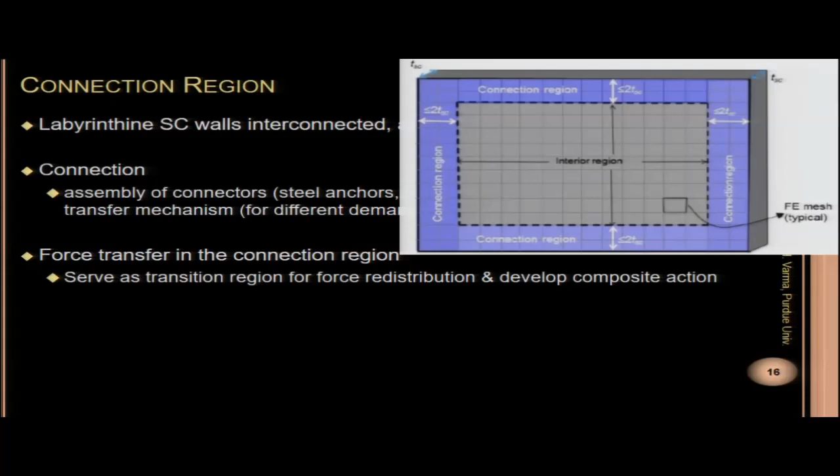It serves as the transition region for force redistribution. It's also where we develop composite action. That's why the requirement is that it needs to be less than 2 times T-SC, but we prefer it to be about 1 times the wall thickness, because that will prevent detrimental congestion of steel anchors and ties. You can try to cram too many in to make that connection region even smaller, but then you may end up with congestion issues of your own.

So let's talk about the connection design specifications itself. There are different connection demand types - I'll talk about that in a moment. Force transfer mechanisms that we need to identify, the connection design philosophy and how to calculate the required strength, and then finally the connection available strength.

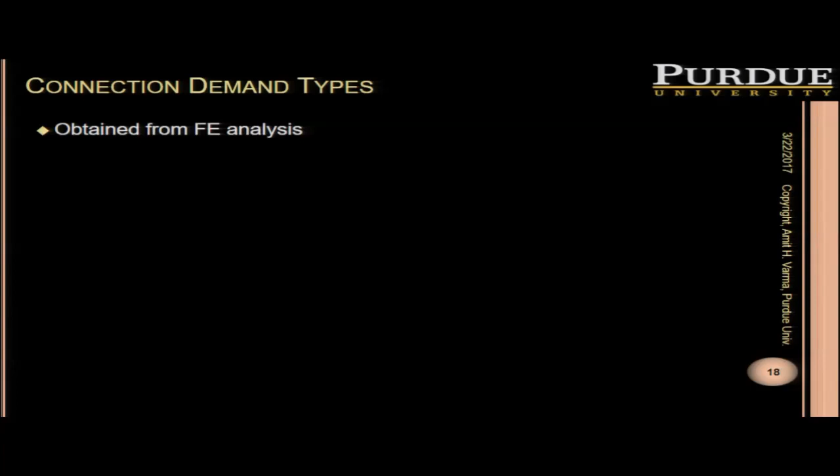The connection demands are obtained from the same finite element analysis. When you model the structure, you model the entire structure using elastic, thick shell finite elements. With these shell finite elements, you're going to have all kinds of demands. But when you get to the connection region, you may need to look at the demands on a per unit length basis. For static loading conditions, condition A, and for condition B, you'll have all these demands.

These demands may be differentiated into seismic demands and non-seismic demands. For all the load combinations shown for condition A and condition B, some included seismic. You keep the seismic demands identified and separate because your connection design philosophy requires it.

For example, if you're looking at the connection region of a wall to basemat connection, you need to make sure that you transfer the axial forces, the in-plane shear forces, the out-of-plane shear forces, and the out-of-plane moments. From a connection design perspective, these are the four forces you need to transfer from the wall into the foundation or basemat.

For each of these, whether it's the axial force, in-plane shear, out-of-plane shear, or moment, a clear, identifiable force transfer mechanism needs to be provided in order to design the connection.

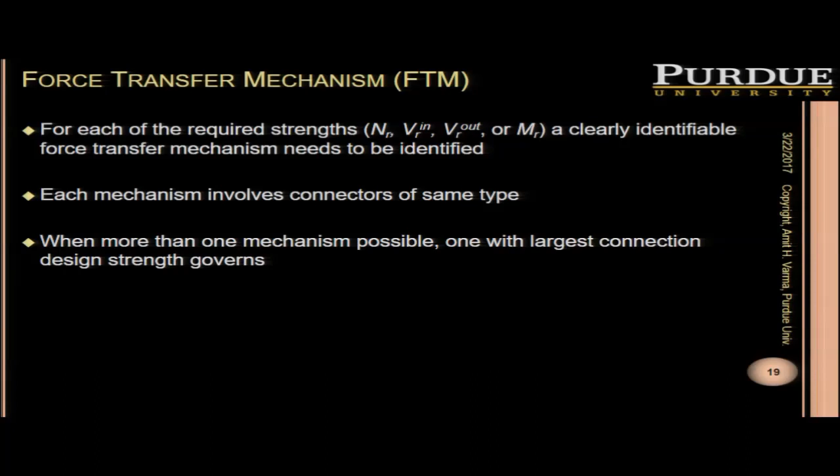Each mechanism should involve connectors of the same type. We don't want to combine bolts with welds. It is possible that you may use more than one mechanism to transfer one type of force. In that case, the one with the largest connection design strength will govern the strength for that particular mechanism.

There are many different types of connectors you can bring to bear—for example, stud anchors, tie bars, welds, and bolts. You can also come up with interesting connectors or fasteners of your own. The difficulty is that if you use a connector that has never been used before, you'll have to do tests to provide data that identifies the strength of the connector itself.

The specification clearly says that the bond between the steel plate and the concrete is not a valid connector at all. So one of the most important parts we need to talk about is the connection design philosophy, because it completely governs the way the connection is designed. It is based on capacity design principles.

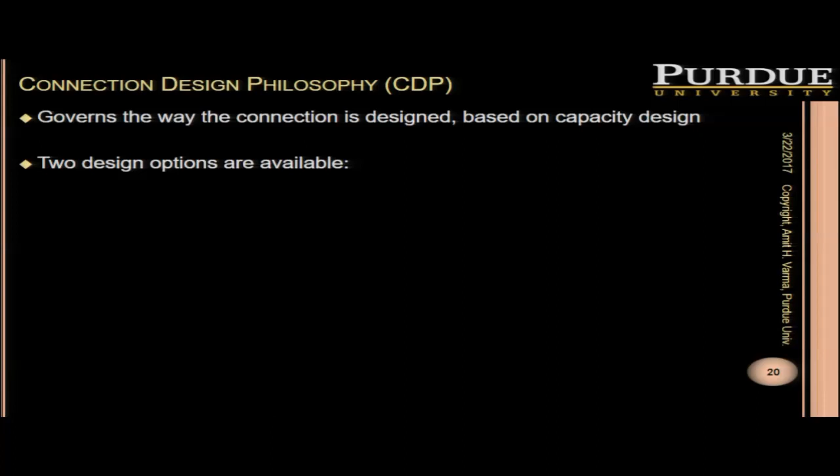The specification permits two design options for these connections. The first is a full strength connection. The full strength connection is such that the connection is always stronger, meaning failure will never occur at the connection—it will occur in one of the connected walls instead. It is designed to be stronger than the expected strength of the weaker of the two connected parts.

On the other hand, if the wall is hugely over-designed due to radiation shielding considerations, the demands are extremely low. For example, you have a 60-inch wall and all across the board your demand to capacity ratios are 0.2 or less. That means the wall is hugely over-designed, in which case it would make no sense to design the connection between the wall and the basemat for the strength of the wall itself.

So we have the option of using an overstrength connection, where we design the connection to be the weakest link because it's weaker than the connected members but stronger than the demands placed upon it by the earthquake itself. In an overstrength connection, we detail the connected parts to have ductility, to undergo inelastic deformation, and dissipate energy for beyond design basis events.

Clearly, a full strength connection is the preferred option. If your demand capacity ratios for the wall are less than 20% across the board, you have to ask yourself why the wall is so over-designed. But if for radiation shielding considerations you cannot change the thickness of the wall, you may need to activate the overstrength connection—I'll show you what it's designed for and what demands it has to meet. But clearly, full strength connections are the preferred option.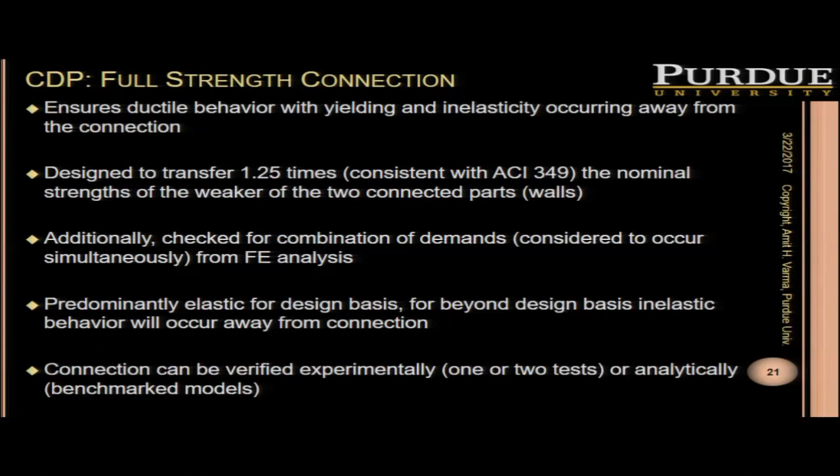For example, I'm showing you here a full strength connection between a wall and the foundation. Under cyclic loading, the inelastic deformations occur in the wall—that's how the energy is dissipated. The connection is not challenged; it remains a full strength connection. Eventually, failure also occurs in the wall itself after dissipating a lot of energy.

The overstrength connection, on the other hand, is used when the full strength connection is not feasible—for example, if the SC wall is over-designed. This may happen at times for particular demand types. In this case, the connection is designed for 200% of the seismic demand plus 100% of the non-seismic demands.

So where does the factor of 200% come from? Why not 150%? Why not 300%? The number was selected based on a lot of evaluation of the purpose of the design. We're trying to accomplish a high confidence of low probability of failure corresponding to 1.67 SSE. To accomplish that, we found the connection needed to be designed for about 189% of the seismic demands plus 100% of the non-seismic demands. We rounded 189% up to 200% to make it a nice round number, but the explanation is given in the commentary, and you can take a look at that.

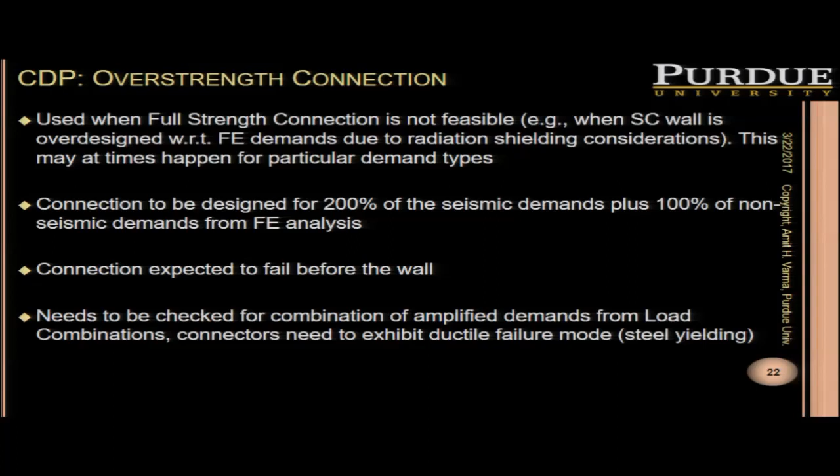The connection is expected to eventually fail before the wall, but it does dissipate energy in the inelastic range before reaching failure. It needs to be checked for the combination of amplified demands from the load combinations, and the connectors need to exhibit a ductile failure mode. The governing failure mode should be ductile yielding. Experimental verification can be difficult, but it does need to be verified for various demand combinations and thermal loading.

So for example, here I'm showing you an overstrength connection. That's the SC wall, and those are the dowel bars going into the foundation. This will not develop the strength of the SC wall; instead, it will develop the strength of the connection, which actually does behave like a reinforced concrete wall.

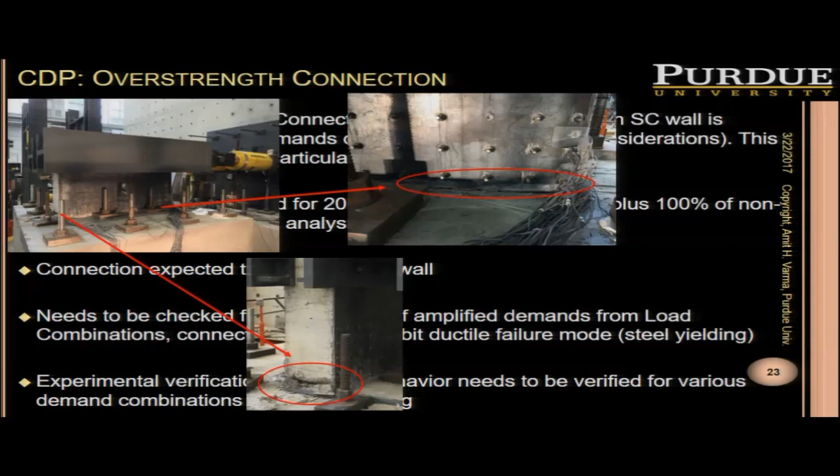When we did the experiment, we found that the behavior was governed by the connection region and the dowel bars themselves, which became a reinforced concrete wall for the purpose of this evaluation. Eventually, failure occurred in this region after much inelastic deformation and energy dissipation, achieving drift ratios of about 2 to 3% before failure occurred in the connection region. So that was an overstrength connection design.

When you think about it, you're calculating the connection design demands, selecting a connection design philosophy for each demand type. You're choosing whether to do a full strength or an overstrength connection, calculating the required strengths, and then achieving them by providing force transfer mechanisms, computing the strength of the connectors for each mechanism, and determining the connector available strength from various references.

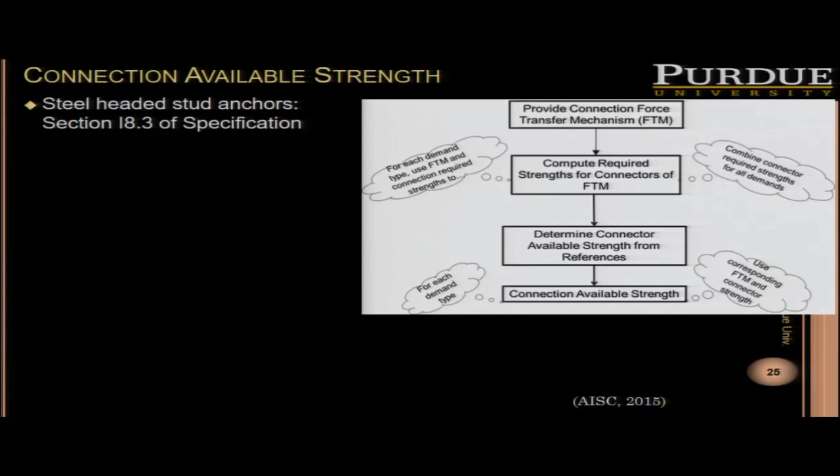For example, if your connection involves steel-headed stud anchors, you would use section I8.3 of the specification to check the design. For welds and bolts, you would use chapter J of the specification. For compression transfer via bearing, you can use section I6.3 of the specification. And for shear friction, you would use ACI 349—similarly for embedded shear lugs and shapes.

Let me give you some examples of typical SC connections. I want to show you an SC wall to base mat connection. Of course, your detailing may be different based on project-specific considerations and site conditions. As I showed you, you can design this to be a full strength connection where energy dissipation occurs in the wall, or as an overstrength connection where energy dissipation occurs in the connection itself, but it does not develop the strength of the wall.

This was part of a system with a pre-stressed concrete containment vessel, which means there was a liner needed all across to maintain the pressure boundary. That's why this base plate could not be interrupted.

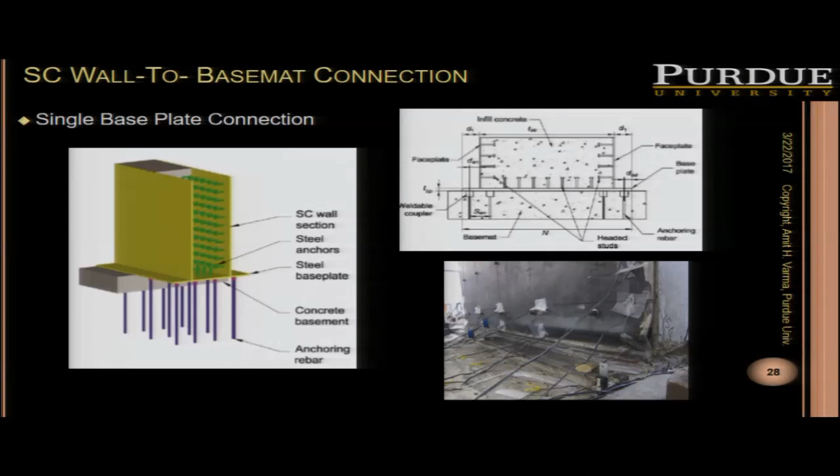This has the ability to develop the strength of the wall. For example, when considering axial tension, this connection has to be designed to develop 1.25 times As times Fy, the tension capacity of the wall. That tension force is carried by the plates, which are welded to the base plate, and that base plate is subjected to that force and then anchored into the foundation.

So this would be the clear force transfer mechanism, and you'd have to design this base plate for the associated bending and prying action, using Design Guide 1, as discussed in detail in Design Guide 32, for the tensile force demand. The base plate has to be designed for any bending stresses and also for prying action.

On the other hand, how do you transfer compression? Compression in the SC wall is transferred through bearing of the concrete and the steel plate onto the base plate, and then from the base plate into the foundation. Since the compression is transferred through a uniform reaction on the base plate, there is some potential for plate bending at the end. This needs to be accounted for, as discussed in the design guide, and the base plate is designed so this connection provides the compression force transfer.

How about in-plane shear transfer? Looking at the SC wall, in-plane shear is transferred from the steel plate directly through the welds to the base plate, and from the concrete portion it's carried partially by the steel plates and partially by the concrete. The steel plate shear stresses are transferred by the weld directly into the base plate. From the concrete, the shear stresses are transferred through the shear studs into the base plate, and then that base plate is attached to the foundation using these rebars and weldable couplers.

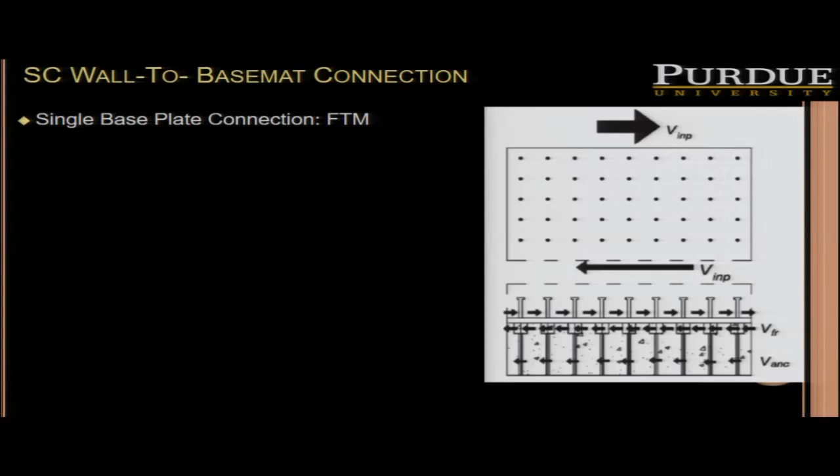These couplers may behave as shear lugs depending upon their size - they can get pretty big. Or you can use a shear friction mechanism to make sure the shear is transferred from the base plate into the concrete foundation below. So very clear force transfer mechanisms need to be provided and checked.

The entire check, there's a whole calculation of this particular connection in the design guide, several pages long. We won't be able to go into the details of that, but I'm sure you can download it and look at it. What about the out-of-plane shear?

The out-of-plane shear from the entire wall is transferred first using these shear studs, from the concrete to the base plate. Then from the base plate, it goes into the foundation below using either the weldable couplers as shear lugs or using a shear friction mechanism associated with these rebar anchors. That's how the out-of-plane shear demands are transferred.

How about the out-of-plane moment? The out-of-plane moment in the wall, the flexural capacity of the wall, is transferred into the foundation. We take this out-of-plane moment and understand it as a couple between compression and tension. Well, luckily, we already did the tension force transfer when we did the tension force transfer mechanism.

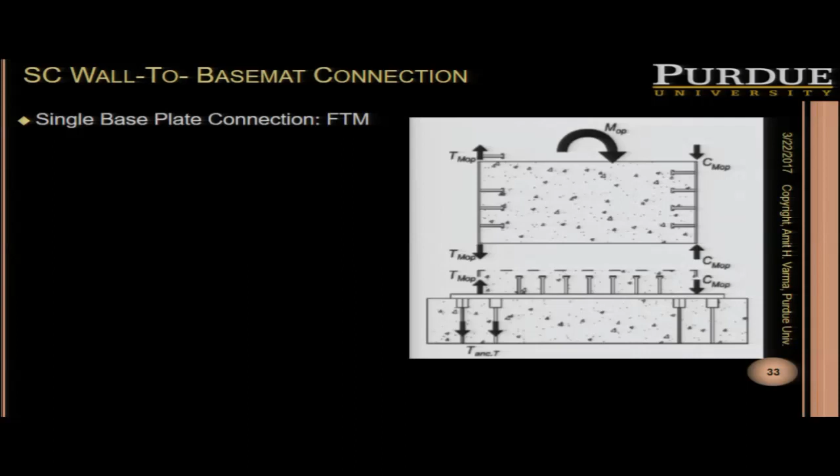This check becomes relatively easy, and all we need to do is make sure that we transfer the compression part of the moment as well. As you start going through the connection design, some of your earlier work starts helping you make sure that you've transferred all the forces.

The detailed calculations of that particular connection design are in the design guide. We won't get a chance to talk about them. There's a lot of calculations there, a nine-step calculation procedure.

The base plate doesn't have to be continuous. It was continuous for that application where a leak-tight pressure boundary was needed. You can always replace it with a split base plate, which actually makes the concrete continuous. It provides a nicer force transfer mechanism for the concrete stresses into the foundation. Everything else pretty much works the same. So this is a very nice variation of the single base plate connection and can potentially work really well.

In order to complete the design of this connection, we had to look at the weldable couplers as shear lugs, and we did some tests. We have some papers on that particular topic as well.

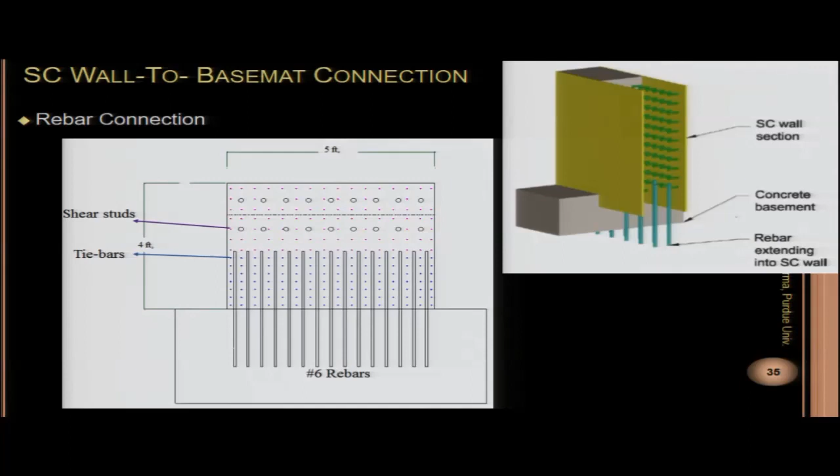Of course, you can also accomplish this connection using rebars. In this case, you're looking at rebars. I already talked about the behavior of this particular system. The test results used to look at the tension behavior and the in-plane shear behavior are the two critical aspects, because the compression transfers through direct bearing between the concrete, so we didn't really need to worry about that.

This is showing you what those force transfer mechanisms are for tension. It goes into the steel plate, from there into the shear studs, from there into the dowel bar, and from that anchored into the foundation. These are clear force transfer mechanisms for various demands, whether it is tension, compression, or in-plane shear.

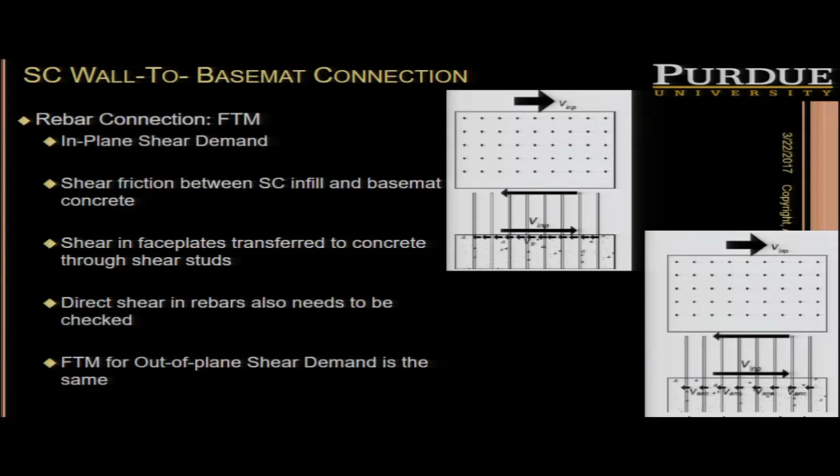That's the in-plane shear. It's being transferred through a shear friction mechanism with these dowel bars into the foundation itself, and that's why we had to do the test to confirm that it works well. There is a splice between the dowel bars and the steel plate, and then that dowel bar is anchored into the foundation, which develops that shear friction mechanism. It works really well and provides the energy dissipation we're looking for.

When you're looking at out-of-plane moment, again, the compression is transferred through bearing, and the tension is transferred through that splice between the plate and the dowel bar.

When you're looking at wall-to-wall connections, you need to have these shear studs at that discontinuous-to-continuous wall interface, because there is an in-plane shear in the steel plate, but there's also in-plane shear stresses in the concrete. The plate can be welded, but the concrete shear stresses need to be transferred, and we're using those shear studs to accomplish that force transfer. So you've got to be very careful in how you transfer the stresses from one part of the wall into the other part.

This is a connection that we recommend, and we talk about it in the design guide as well. I won't get into too much detail, but this joint shear region is very important, and this joint shear has a joint shear strength we need to be aware of. The joint shear strength turns out to be 12 times the square root of F prime C times AC, which we get from the ACI publication for joint shear strength, and we show the applicability of that using our equations.

I think I would like to show one more connection before I pause and take questions. What I'm going to do is actually go down. And that's the connection that I wanted to look at.

This is the wall-to-RC-slab connection. We're looking at a simpler mechanism here between the reinforced concrete slab, which has weldable couplers and rebars located in the RC slab, and then the tie bars and the rib plates inside the wall, in order to get that continuous force transfer into the system.

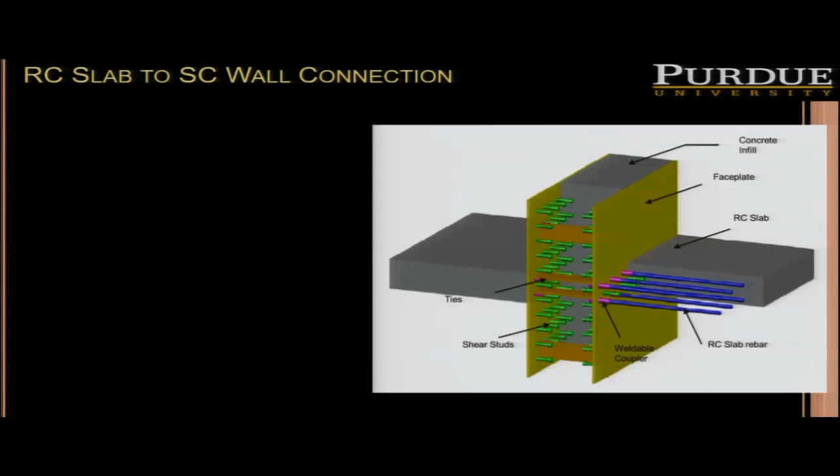This is an RC slab to SC wall connection. We talk about the force transfer mechanisms for this in the design guide, but we don't have a design example for it because it would be fairly long as well. This is showing you how the ties are aligned so that we can transfer the stresses from the slab into the wall and so on.

It discusses the force transfer mechanism when we look at tension, in-plane shear, and out-of-plane shear, and how that is transferred from the slab into the wall itself, as well as out-of-plane moment. It also talks about the joint shear developed associated with that. You'll have to read the design guide to see how all those calculations work out.

The PDH code for this session was 16376. We tried to summarize design guide number 32, which is quite extensive. It shows the application of N690 S1, including the design of SC walls and SC wall connections, which included connections to the base mat, connections between walls, and connections with slabs.

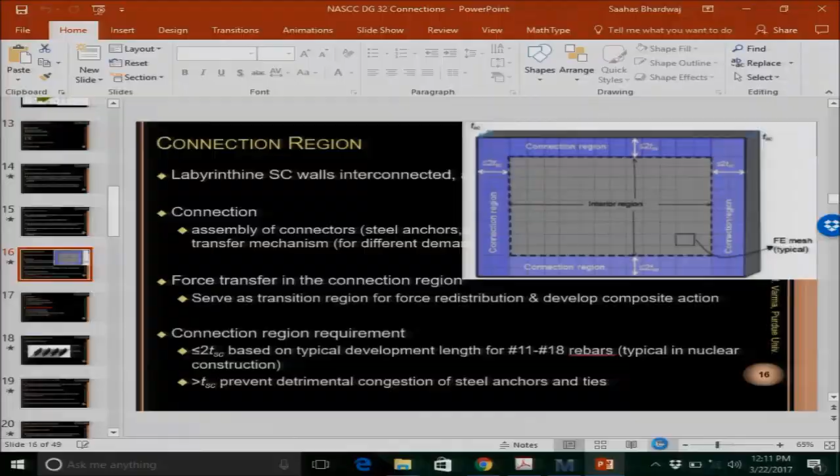Because if I'm using number 11 bars that I need to develop, they're going to be, if I've got a 3-foot thick wall, I guess they're going to be beyond your connection region. Yeah, so that's why I was trying to figure out, why is that limit less than 2 times the thickness of the wall?

Well, if you imagine using number 14 bars, which you can absolutely do in a nuclear construction, your development length could be about 100 inches, depending upon the calculation. And if you went 100 inches from here, and 100 inches from here, and 100 inches from here, you'd have an interior region that would be one element located in the middle, right?

You've seen this happen in brace frame design, where the gusset plates get to be so big. There's a famous photograph where the gusset plates are so big that you've got a little bitty brace in the middle. We don't want to get there, so what we're saying is we don't recommend that. We want the connection regions to be shorter than 2 T's.

Now if you're saying, well, I have a number 14 bar, how do I develop it? You don't have to use bond between the rebar and the concrete to develop the bar. There are other means, mechanical means. For example, for a number 14 bar, there are terminators and different mechanical anchors by which you can shorten your development length. But you have to make sure that, since you shortened it, you've dropped off a lot of stresses into the concrete, you pick it up into the steel plate. That mechanism of force transfer has to be there.